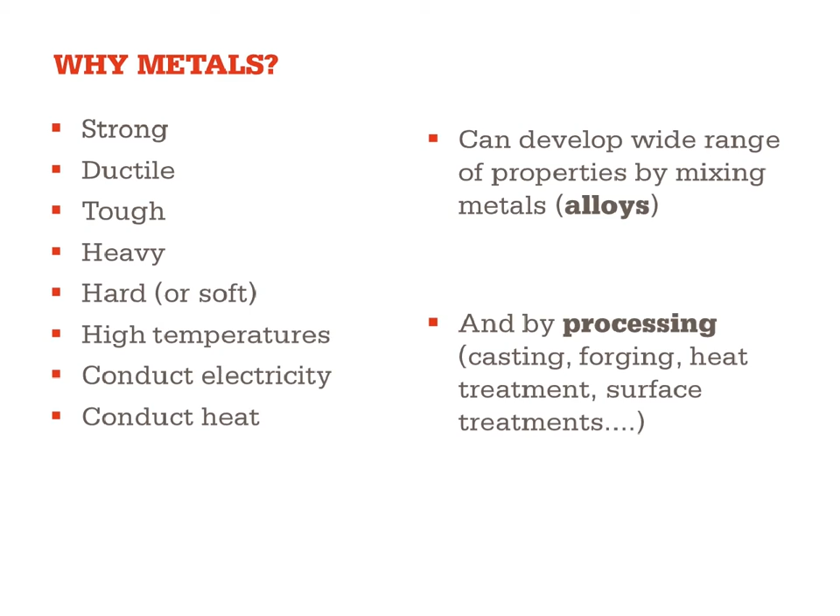There are so many different types of metal and different types of alloy, it's impossible to list them all. There are many thousands. So when you say metal or alloy, you're actually talking about a very wide portfolio, a very wide range of materials. And indeed, for each of those materials, the way in which they're processed makes a dramatic difference to the final properties of the finished product.

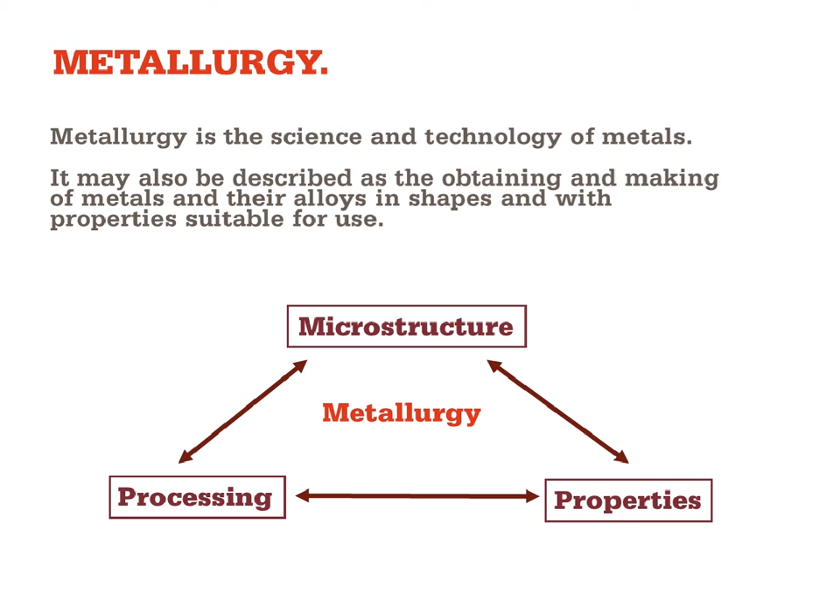For me, the definition of metallurgy really is understanding the manipulation of the microstructure of the material we're dealing with to influence the properties. And that in turn, if you can see the triangular diagram on the screen, the properties influence the way in which the material can be processed. But in fact, processing - heat treating, forging, casting, etc. - does change the microstructure and in turn changes the properties. So this triangle, we go round and round in circles - each of the two aspects influences the other. And that really is the profession of the metallurgist: to understand all of this and to advise engineers and production people on which material to use for a given application, and how to produce the product from that material.

So in the Fundamentals of Metallurgy training course, we explain in fairly simplistic terms that all materials, particularly all metals, are made up of atoms whose size is somewhere between 0.1 and 1 nanometers. We explain what that means - 1 nanometer is 10 to the minus 9 meters - just to get people to understand that we're talking about things happening on an exceedingly fine scale.

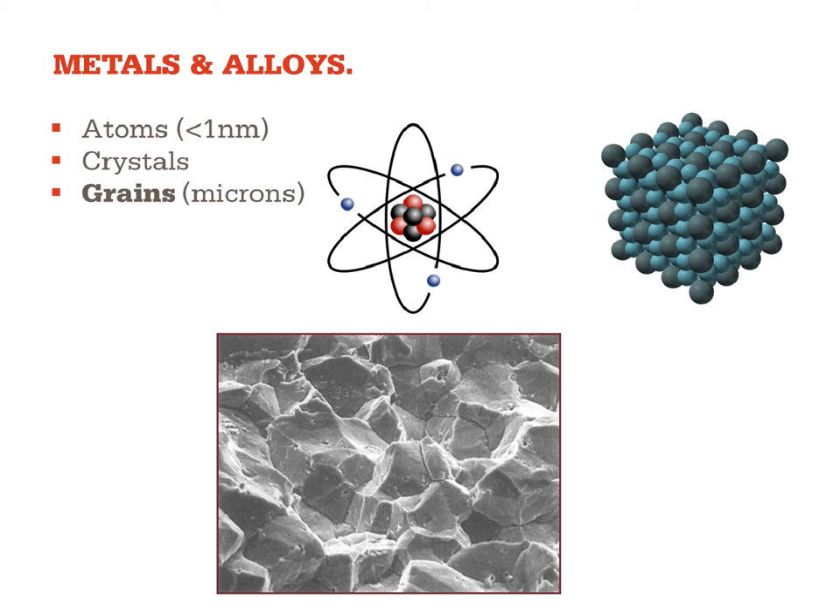We then explain that the atoms are lined up, as you can see on the top right here, into crystals. And then those crystals are organized into grains, which are moderately large chunks of material, as you can see in the image at the bottom. In that course, we explain the relevance between these different features of metals and alloys.

Each pure material, pure metal, will naturally adopt one of those structures in a crystallographic setup. But some materials, notably iron and titanium, actually transform from one structure to another at a critical transition temperature. And that opens up a whole field of heat treatment technologies whereby we can modify the properties of the material by heating and cooling at different rates.

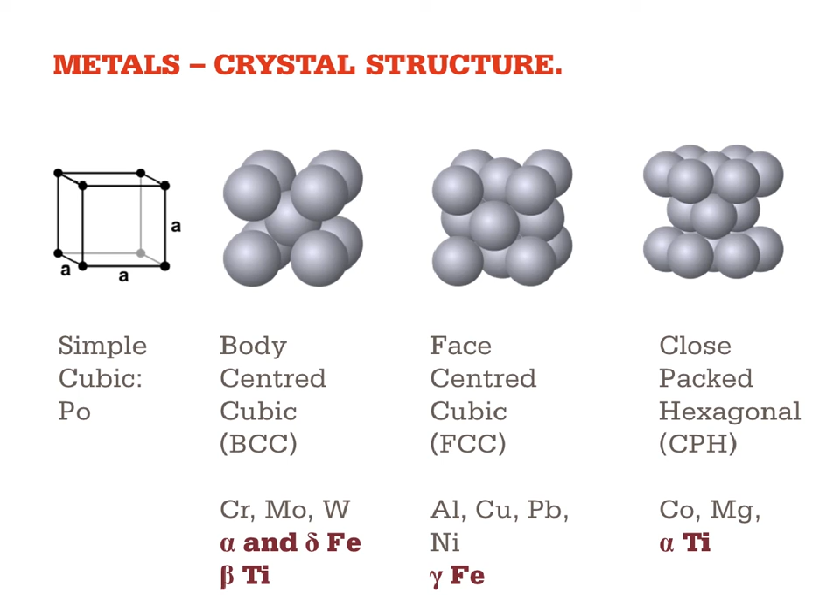So in the fundamentals of metallurgy and the metallurgy for non-metallurgists course, we explain that in more detail.

We also explain that when you are producing an alloy by mixing metals together, or mixing metals and non-metals - for example, introducing a small amount of carbon into iron to produce steel - those elements are not generally soluble to a large extent. So depending on the temperature and the circumstances, iron will only accommodate typically up to 2% of carbon, and under some conditions it's very much less than 2%.

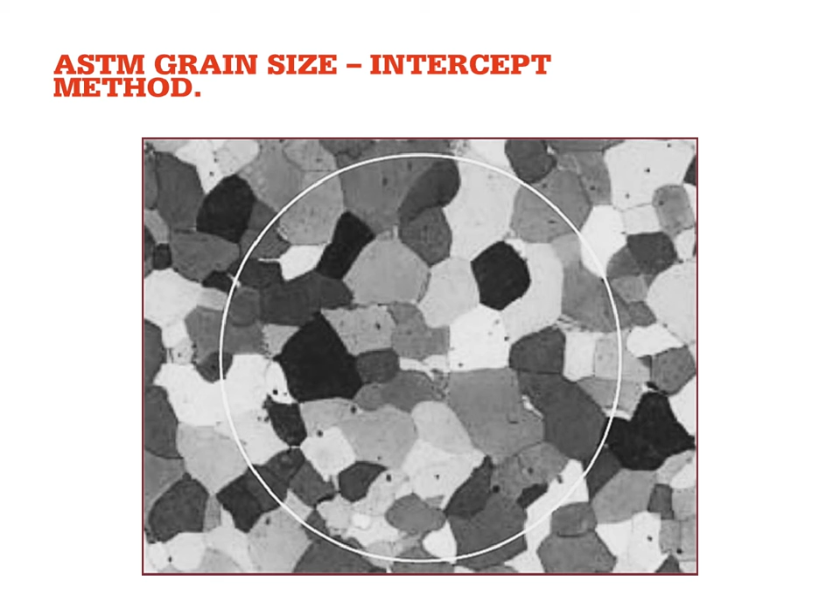Also, the grain size - each grain, in this two-dimensional cross-section through a three-dimensional structure, has a number of phases and a consistent crystalline structure within it. The size and shape of those grains will also have a massive influence on the mechanical properties of the product. So we explain how to manipulate and understand grain sizes.

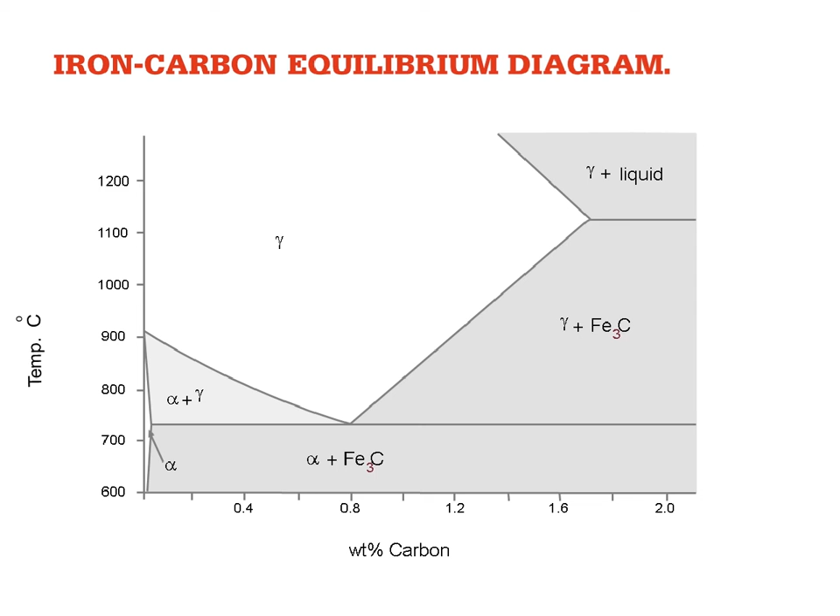Going into a little more depth with steel - I mentioned iron, so on the left of the diagram here, at the origin of this plot we have 0% carbon, pure iron. You can see that the gamma phase in the middle, the rhombus-shaped area, is called austenite. That combination of temperature and carbon content shown in the rhombus labeled austenite is where the carbon is dissolved in the iron, and it's a face-centered cubic structure which we call austenite.

When we come down to lower temperatures, that austenite becomes unstable and separates out into ferrite, which has very, very low solubility of carbon, almost zero, and exists below 900 degrees C. On the right-hand side of the diagram, you can see cementite, iron-3 carbide, which is rich in carbon. So the stripy pearlite structure we were looking at is actually alternating layers of ferrite and cementite, and the morphology of that is critical in determining the strength and other properties of the steel.

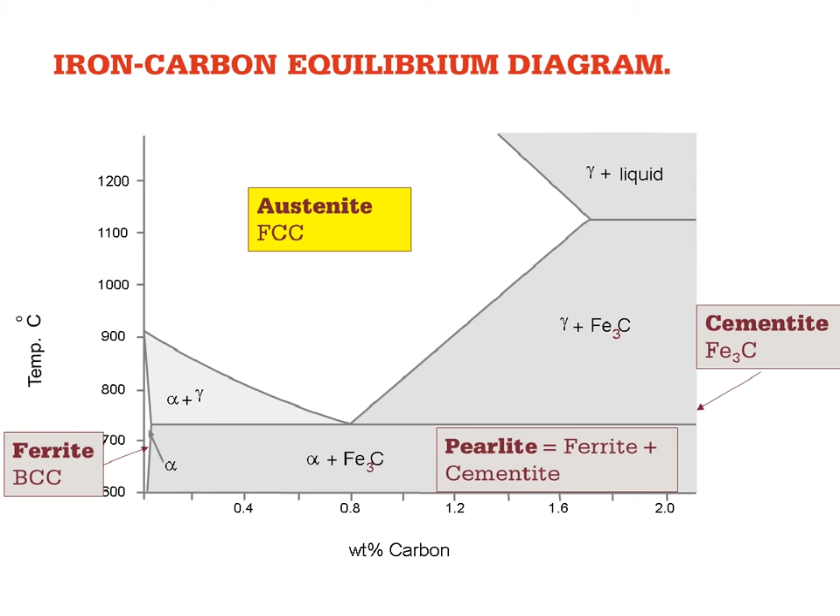And that's explained in great detail in a course, a one-day course, six hours, talking about different types of steel.

So anything we can do to prevent those dislocations from moving around will strengthen the material.

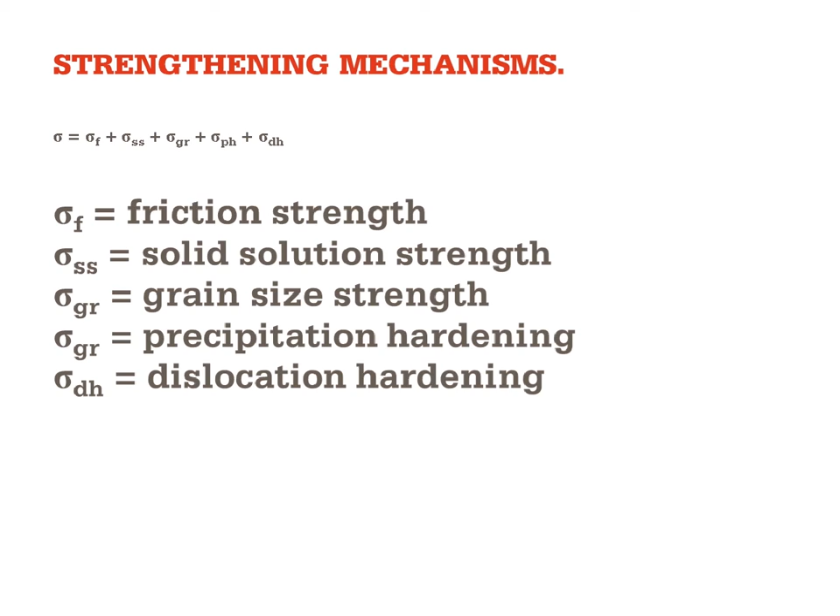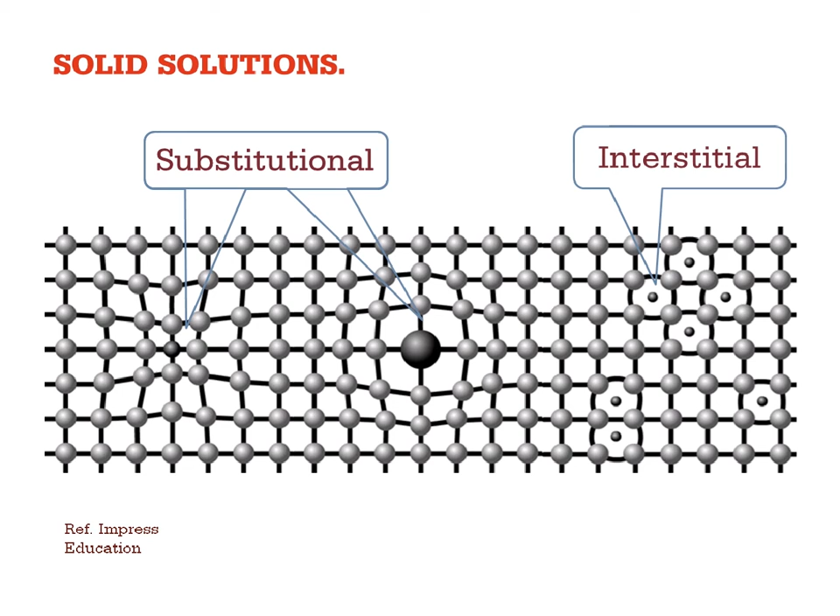If I can move on to give an illustration of a solid solution. Here we have, for example, this could be a copper alloy or a steel, where we've got iron atoms or copper atoms in the majority. If we introduce another atom, it might be slightly smaller or slightly larger than the parent lattice, and that would be a substitutional introduction, or it may be an interstitial atom. So carbon in steel actually sits in between the iron atoms, as you can see on the right. We need to understand all of that to understand the strengthening mechanism due to solid solution, substitutional and interstitial alloying.

We also need to understand the growth and control of precipitates, such as nickel-3 aluminium, and carbides, for example.

Graham, we've got a couple of quick questions here. One of the questions is, why is dislocation necessary for the metallurgist?

It's necessary because the strengthening and control of the material, and the toughening, is all determined by the ability to stop those dislocations from moving, or to make it more difficult for them to move. The way we do that is by introducing or constructing alloys with different combinations of metals. For example, the precipitates you can see here are nickel-3 aluminium, so we need to understand the amount of nickel and aluminium to introduce into our alloy, and then how to heat and cool it to get these precipitates. They are very tiny in this instance, to make sure they have the correct size and volume to give the maximum strengthening effect. So the metallurgist has to understand all that, and that's what you would learn if you were to do a degree in metallurgy at university.

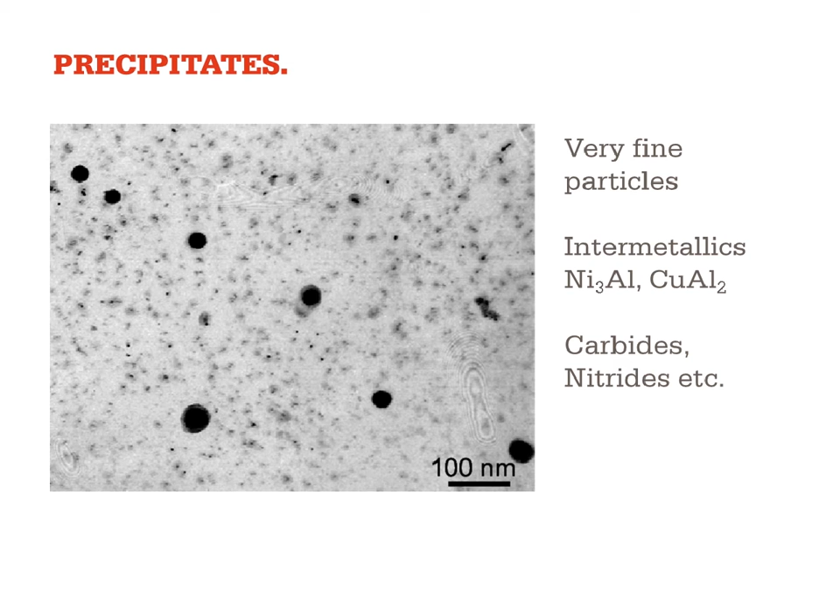Okay, and just one more on the dislocation side. Does a dislocation result in ductility?

A dislocation moving results in ductility, yes. So if there were no dislocations, the material would not be ductile. The more you have, and the more mobile they are, the more ductile the material, unless you get to a point where you have so many that they actually interfere with each other, and that's the basis of work hardening, if you're familiar with that term.

Particularly in cold forming, if you repetitively roll a material to form a sheet, you'll get to a point where you've rolled it so much, you've produced so many dislocations that it actually becomes brittle and the sheet will shatter. A simpler illustration is if you take a paper clip, straighten it, and then bend it back and forth. It will be ductile initially, easy to bend, and when you've done it ten or twelve times, it will break because it's become brittle. That's due to the generation of a very large number of dislocations.

Okay, so I'd like now just very briefly to describe what is contained in the training courses dealing with carbon steels, stainless steels, and a family of non-ferrous alloys.

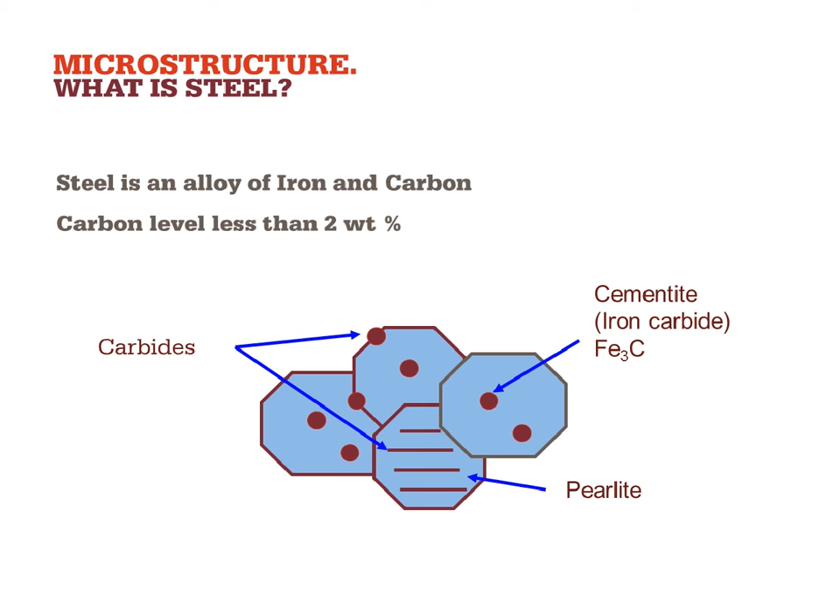So to control steel, and to understand steel metallurgy, we need to understand the role of those alloying elements, those metals, but very importantly, we have to understand the role of carbon. As I said, a 2% carbon steel would be a very high level. Typically, we would have less than 0.5%, less than 0.1% of carbon in some cases. And we have to understand where that carbon resides. This is a schematic illustration of the stripy pearlite structure that I mentioned, but also there can be a tendency for freestanding carbide particulates to form, and those will also contribute to the mechanical properties of the material. So we need to understand all of that.

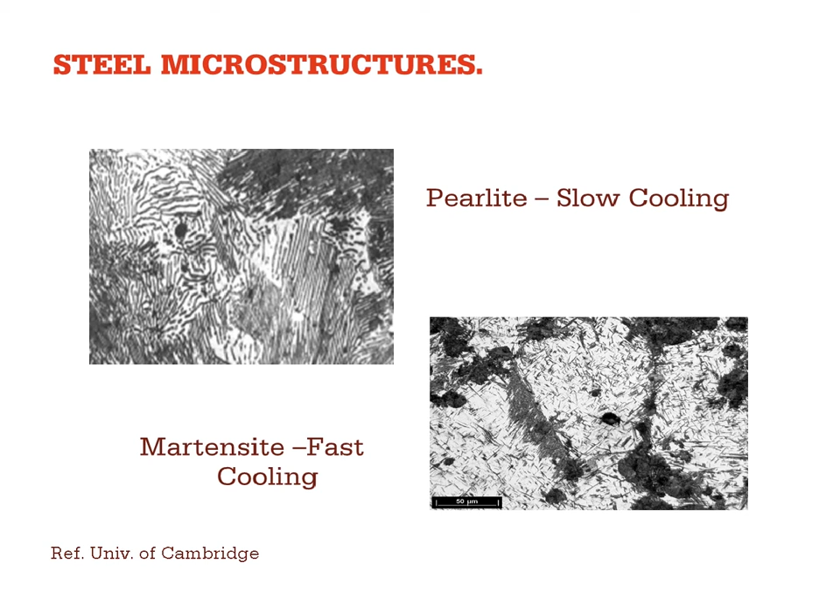We also have to understand the consequence of varying the cooling rate. So if we take a material up to the austenite region, which on the phase diagram would typically be around 950 degrees C, if we cool it slowly, we get the pearlite structure. If we cool it very quickly from 950, we actually get something very different. This is dealt with in the heat treatment training course. The mechanical properties and the way in which pearlite and martensite will perform in service are very, very different. And it's exceedingly important that we understand that.

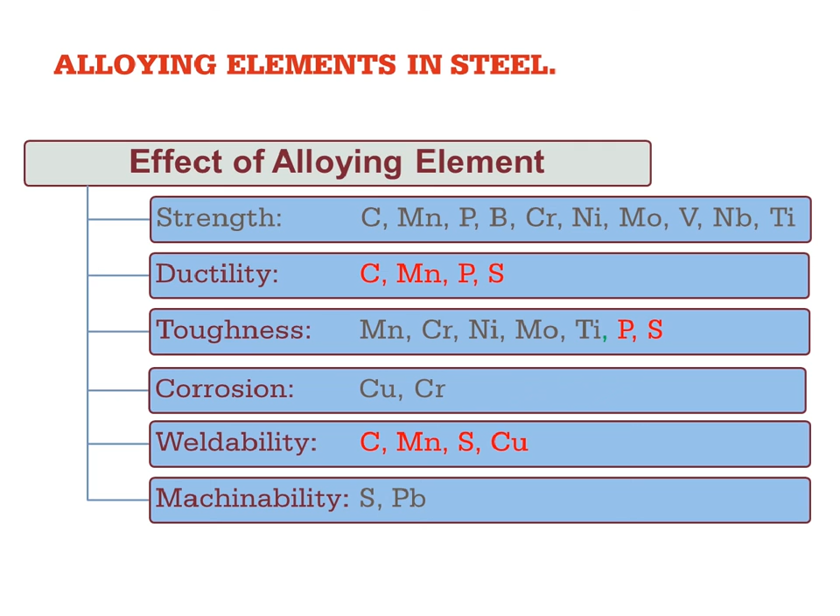And we also need to understand the effect of the various alloying elements that I've mentioned. On this slide, the red ones mean that if you have too much of these alloying elements, they will have a negative effect. So too much phosphorus or sulfur will reduce the ductility and reduce the toughness, whereas manganese, chromium and nickel will increase the toughness. Weldability is poor if you've got too much carbon. Sulfur again is bad news. So we have to understand the science behind the influence of all of these alloying elements on these various mechanical properties.

Graham, I've got another question coming in here, if you're happy to. Can the mechanical property be changed? Can the mechanical property be changed infinitely by changing its temperature, or is there a certain limit to this change?

That's from Manish. No, there is a limit. There are upper and lower limits, but with some steels, you can change the tensile strength or the toughness or the hardness for exactly the same piece of material with the same chemical composition. If you heat it up and cool it slowly, it will have one strength. If you heat it up and cool it very quickly, it could be 10 times the strength. So you can vary these mechanical properties by a factor of 10 in some cases. And these are reversible reactions.

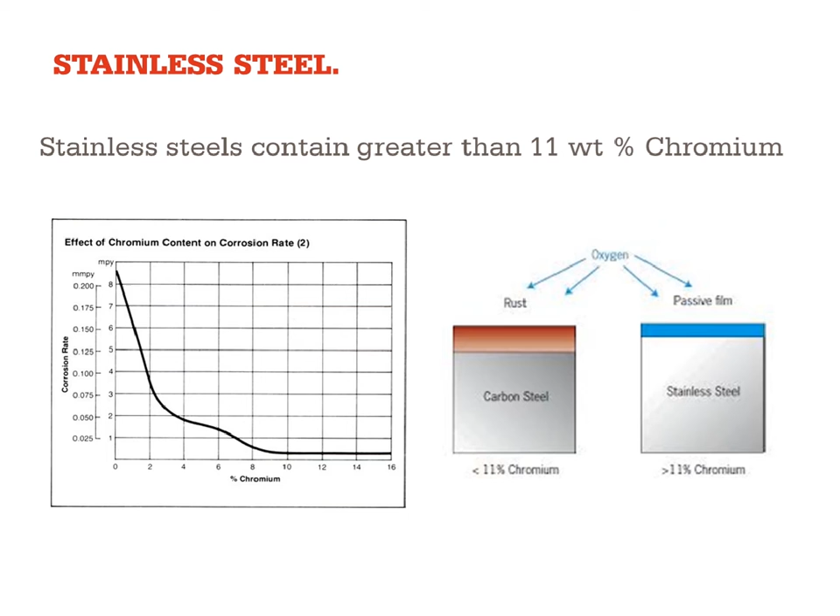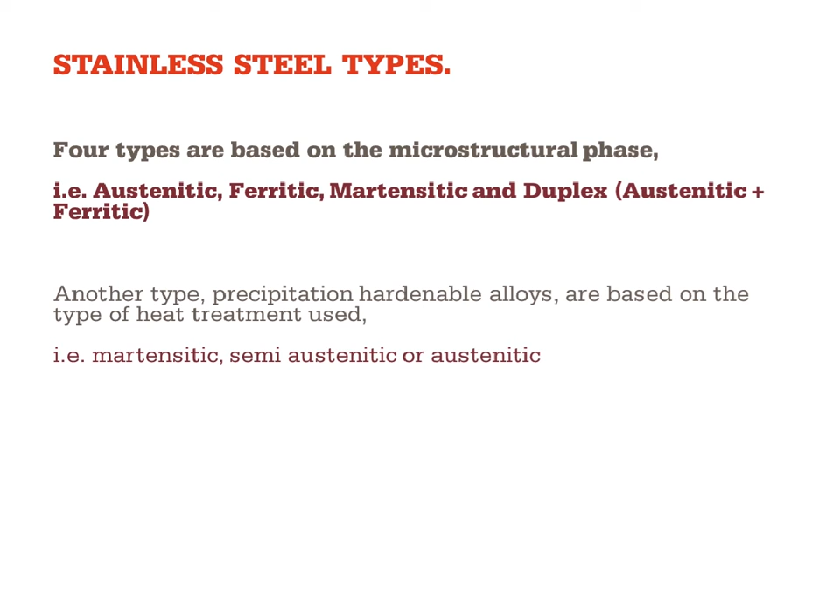Stainless steel—here we are looking at a plot of the rate of corrosion as a function of chromium content, and you can see it drops off rapidly, with the cutoff generally at about 11%. So for a material to be a stainless steel, it should have at least 11% chromium. There are many different grades of stainless steel, and we have a full 6-hour training course explaining the differences between austenitic, ferritic, martensitic, and duplex stainless steels, and also precipitation hardened steels. I apologize, I just don't have time to go into all the detail of those today.

I'd like to move on just quickly to touch on aluminium alloys. These are rather different—the melting point of aluminium is 660, while the melting point of iron and steel is about 1,600. But aluminium, as you'll be aware, is very much lighter. So for lower temperature applications where weight is important, aluminium may be the material of choice.

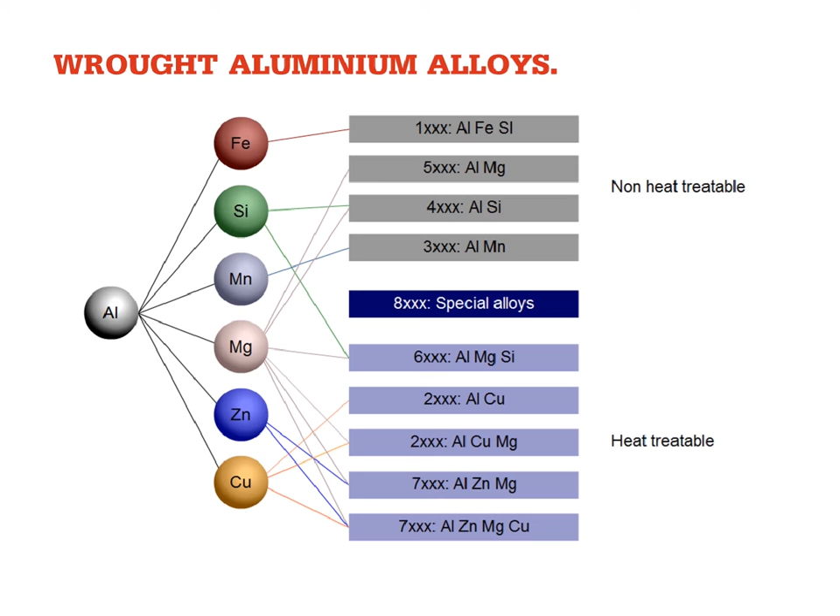There is a systematic nomenclature for the different types of alloy depending on the principal alloying element. So if it's mainly aluminium but the second most common element is iron, then it's a 1 series, and you can see the other series here. Some of these can be heat treated, others can't, and there's a lot of science and understanding behind the different types of aluminium alloy and how you select and control them for different applications.

In the course on aluminium alloys, we would go into detail looking at the applications in aerospace, as you can see here, food containers, takeaway meals. A lot of engine blocks for vehicle engines are cast in aluminium for weight saving. We've got here a petrol tank, bottom left. Aluminium alloys are used in architectural applications and also for automotive vehicles.

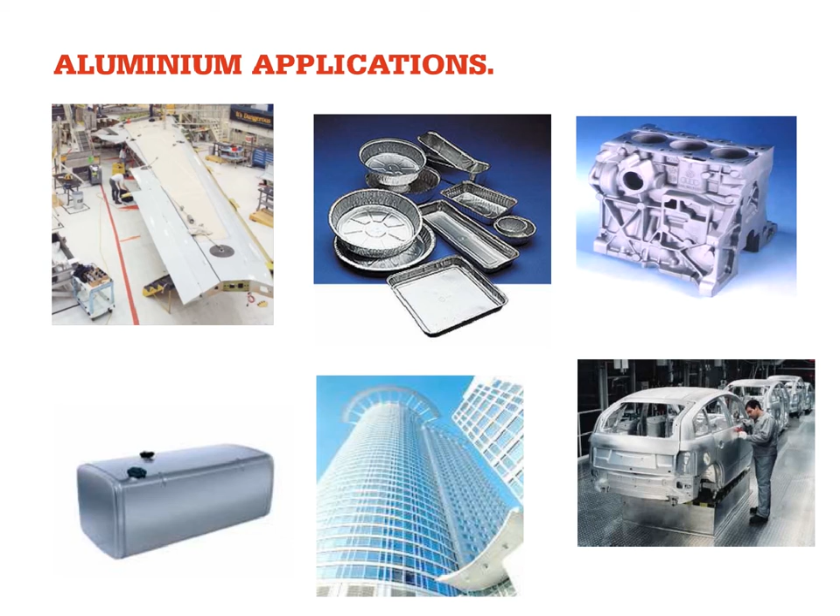Another category of non-ferrous alloys are the titanium alloys, and there are a wide range of those, many of which are heat treatable, because I mentioned briefly that iron has a transition at 910 degrees C in its basic fundamental crystal structure. Well, titanium does something similar at 883 degrees C. So we can use that to our advantage by adding different alloying elements and creating what we call alpha or beta alloys. You can see here some of the chemical compositions: titanium plus additions of aluminium and vanadium.

This one, so-called 6-4, or titanium grade 5, accounts for about 75% of all titanium alloys. It's very much the workhorse because it has an alpha and beta structure, and that's used for a very wide range of applications.

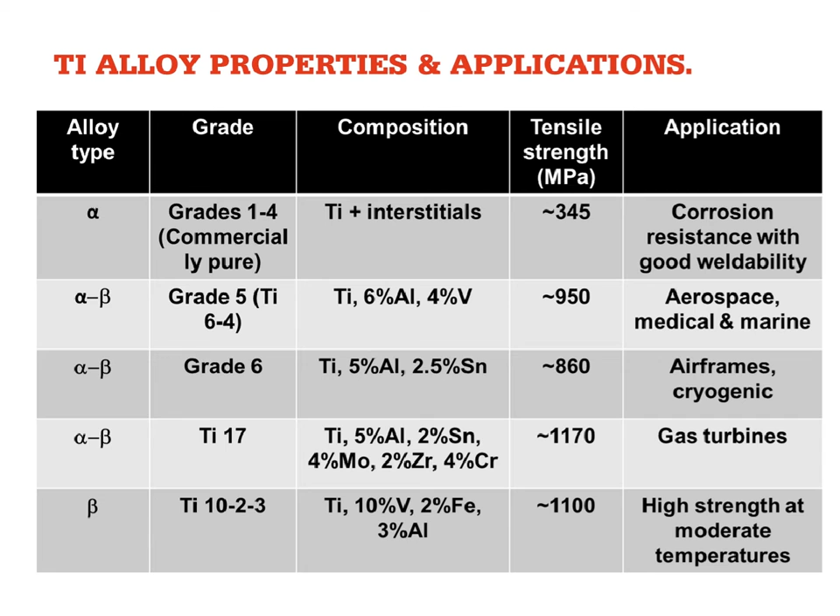Titanium is quite expensive, but it has special properties which make it the material of choice for particularly higher temperature, corrosion resistant applications, but also it's relatively light.

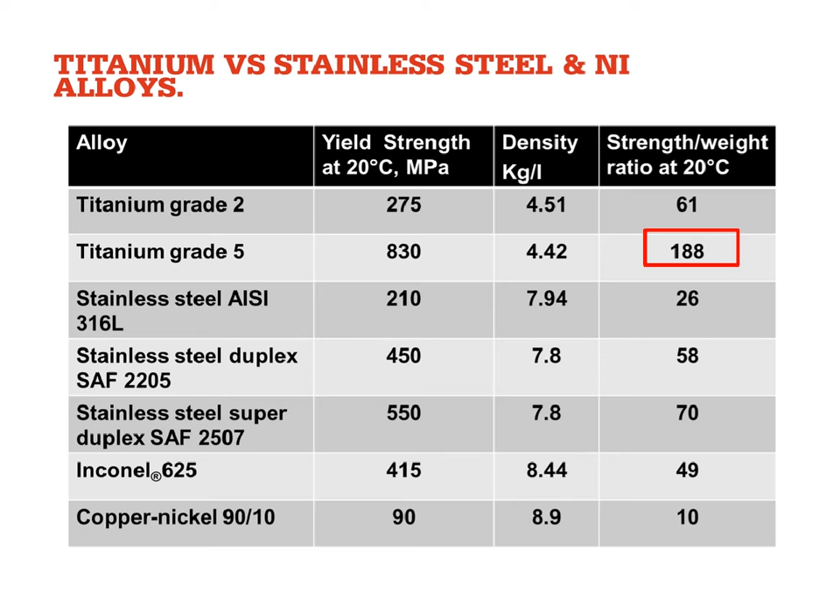So if you're looking at strength to weight ratio as your main criterion, perhaps a classic example is the landing gear in an aircraft, where you want it to have the strength to do its job when you land the aircraft. When you're flying, you don't want it to be too heavy because that costs a lot of money in fuel. So you can see here for grade 5, the strength to weight ratio at 188 is very much higher than, say, stainless steel or other forms of steel. That is where titanium alloys come into their own.

There are other applications in chemical processing. The oil and gas industry makes use of the chemical and corrosion resistance of titanium alloys. In biomedical applications, titanium is resistant to corrosion by blood and bodily fluids, so if you need a hip transplant or a false knee, that's very likely to be titanium. It's also used in armor because of its high strength to weight ratio and impact resistance, and in aerospace, particularly military applications. So if you can afford to use titanium it's an excellent material, but for some industry sectors it's simply prohibitive on cost.

Finally, we move on to the nickel-based alloys. Nickel has a face-centered cubic structure at all temperatures, as does aluminium. That means we are limited in the way we can heat treat nickel alloys, but we can strengthen them by replacing some of the nickel atoms on the lattice with other metals, using the substitutional strengthening mechanism.

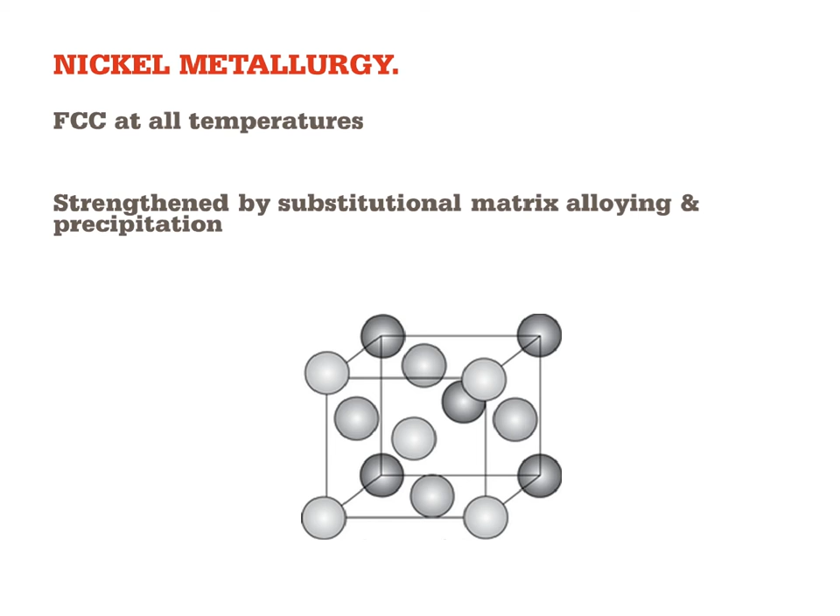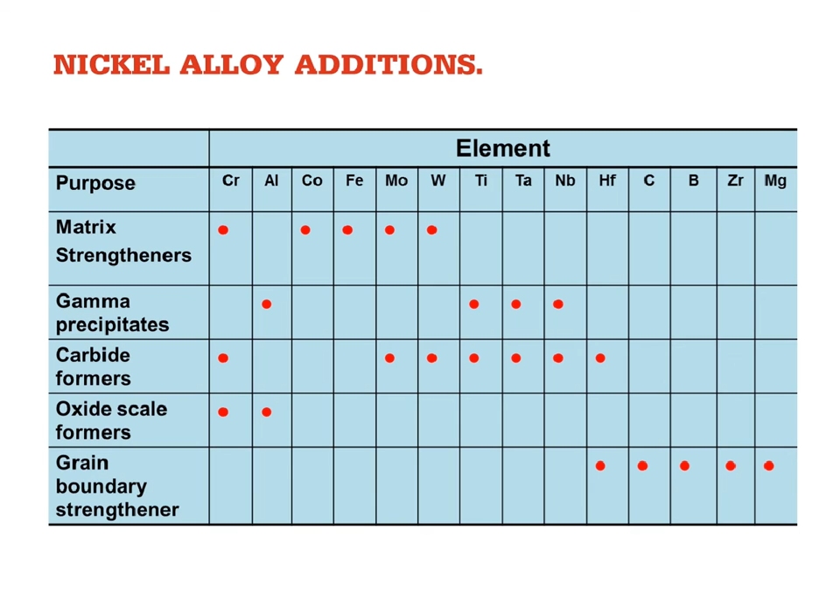But the main metallurgical feature of nickel alloys is a large number of different forms of precipitate, growing very small volumes of precipitate materials, for example using titanium, tantalum, niobium. We can grow carbides of chromium, molybdenum, hafnium, as you can see here. Sometimes we want to grow precipitates on the grain boundaries to prevent them from moving, particularly for creep resistance, so things like boron and zirconium would be used for that.

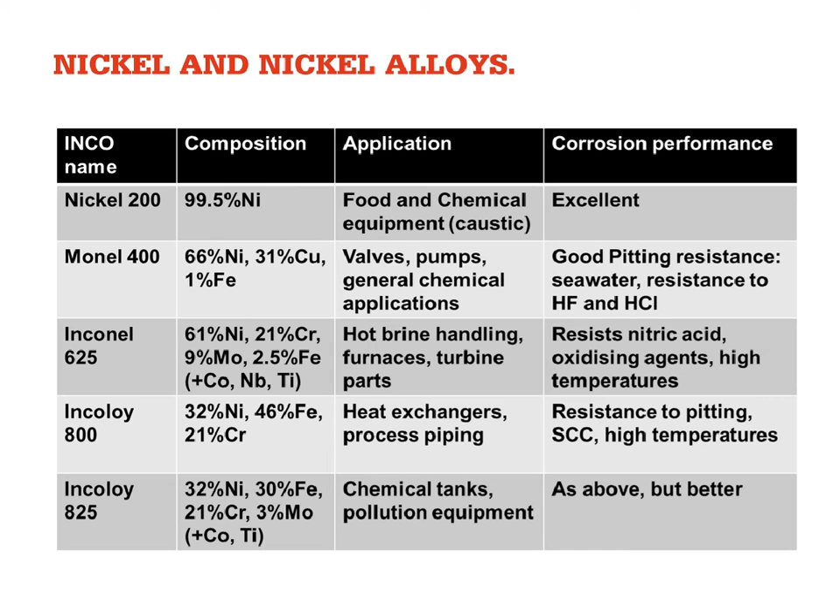In the non-ferrous alloy course we go through various grades of different types of nickel alloy. You may have heard of some of these: Inconel, Incoloy, 625, 718 is another one not mentioned here. The different chemical additions made to nickel to form these alloys, how they are heat treated, and a wide range of applications, very often revolving around corrosion resistance but also high temperature. Nickel is again an expensive material, but there are situations in chemical processing where it really is the only viable material. It's also used extensively in the oil and gas industry.

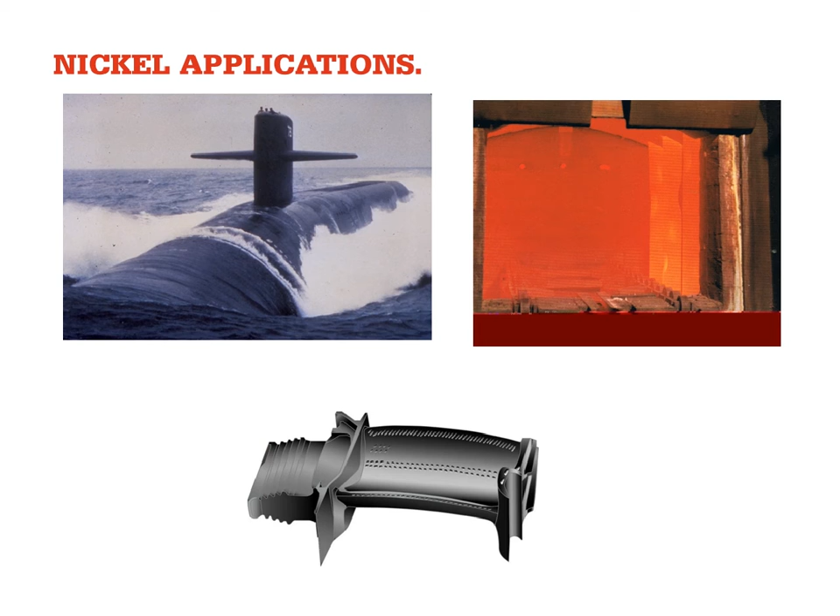Typical applications would be perhaps offshore—here's a picture of a submarine. Also a specialized application is in single crystal turbine blades for jet engines and gas turbines, where the precipitation strengthening of the nickel alloys increases their creep resistance at very high temperatures, which is the limiting factor for these high pressure turbine blades. We need creep resistance at the highest possible temperature—the hotter you can run your engine, the greater the fuel efficiency. And finally, this orange picture shows the application of nickel as the containment in a high temperature furnace.

So I now wanted to move on to look at how we manufacture products from these various alloys. Most of the manufacturing processes can be applied to most of the alloys we're concerned with, with varying degrees of success. There are 4 training courses, each of 6 hours duration, that deal with this in a lot more detail. One way in which we can make shapes is by casting, and there are 3 generic forms of casting.

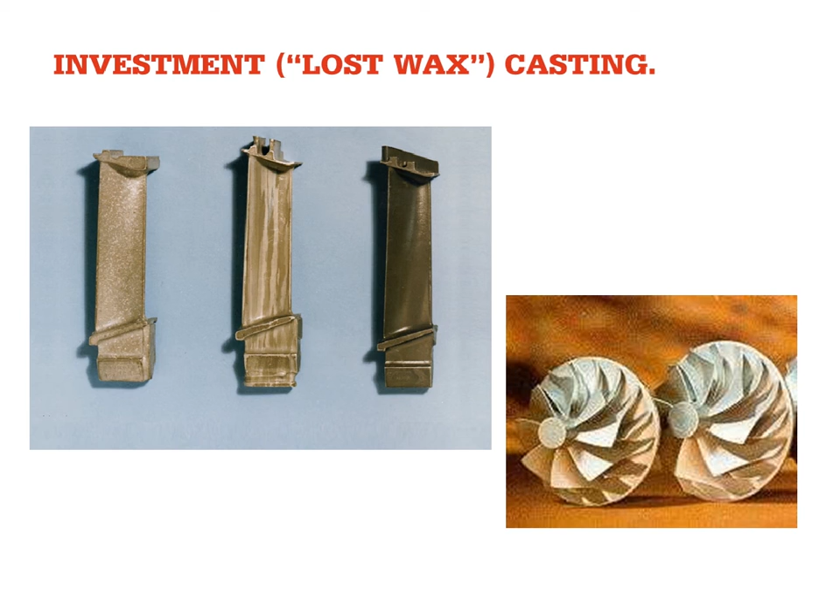The lost wax process, or investment casting, is used for turbine blades and also for things like impellers. Here we make a model of the piece we are going to produce in wax, then coat that wax with a ceramic high temperature refractory material. We bake that to cure the ceramic and melt the wax, so we have a ceramic shell with a cavity of the correct shape. We pour the liquid metal into that cavity, and when it's cooled and solidified, we smash away the ceramic shell and are left with the solid metal product. That is, very simplistically, the investment casting process.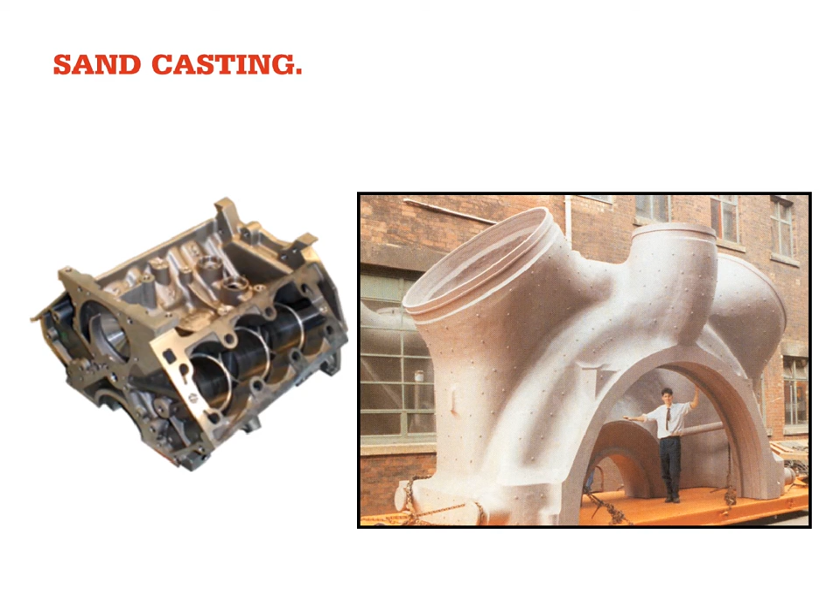An alternative is sand casting, used for things like vehicle engine blocks, and this very large junction here is for an offshore pipeline in the oil and gas industry. Here we make a pattern of the product we're trying to produce, then surround that in a box, fill the box with sand with a binder, and compact it. We remove the pattern and put two mold parts together from sand, which again enclose a cavity into which the liquid metal is poured, solidified, and when it's solid and cool, we break away the sand and are left with the shape we require. Both of these techniques are destructive in that the mold or die can only be used once.

If we go on to die casting, often used for low temperature materials like aluminium or magnesium alloys, we use a metal die into which is machined the cavity of the shape we require. We pour the liquid metal into that cavity. When it's solid, we open the two parts of the die, recover the part, and can immediately reuse the die by closing it and pouring fresh metal in. So that lends itself to automation.

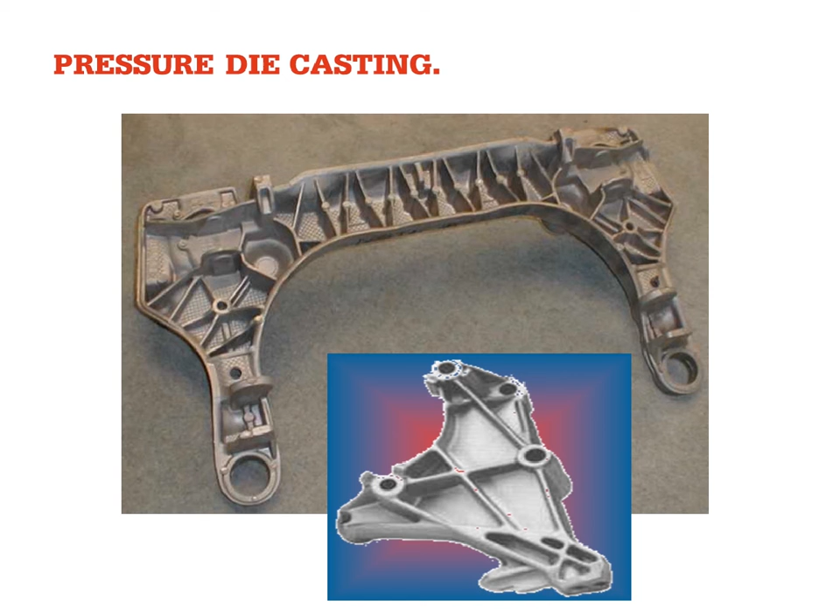So for large volumes of quite intricate shapes, we may well be using a die casting process. We can also inject the metal at a high temperature and a high pressure, and we can control the temperature of the dies more accurately, so that gives us a greater degree of process control.

So casting as a generic process, be it investment casting, sand casting, or die casting, has the advantages that it can produce very complex shapes. You can make products close to net shape, so only a small amount of machining is required to get the finished product. It's applicable to a vast range of sizes, from a few grams up to a few hundred tons, and it's amenable to mass production of large volumes of products.

Some of the disadvantages of casting are that we have limited control over the microstructure of the product, so there is a tendency for porosity to be introduced.

Sorry, I'm just trying to move back to here, we are.

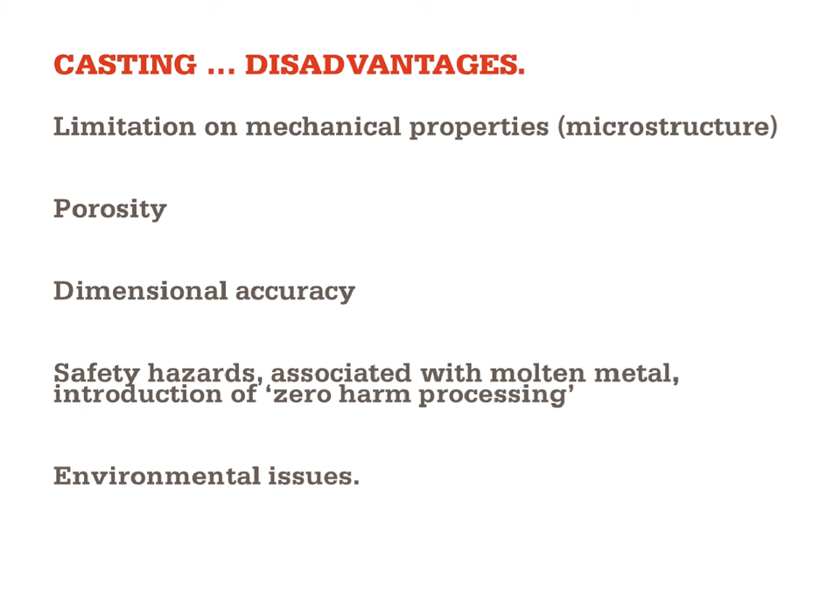Porosity, and also dimensional accuracy, can suffer, because if you think about it, we've produced a cavity, poured liquid metal into that cavity, and that metal then solidifies. But all metals and alloys have a coefficient of thermal expansion, and when the material solidifies from just below its melting point down to room temperature, it will contract by typically 3 to 4%. So the dimensions of the finished product are not the same as the dimensions of the model we started with.

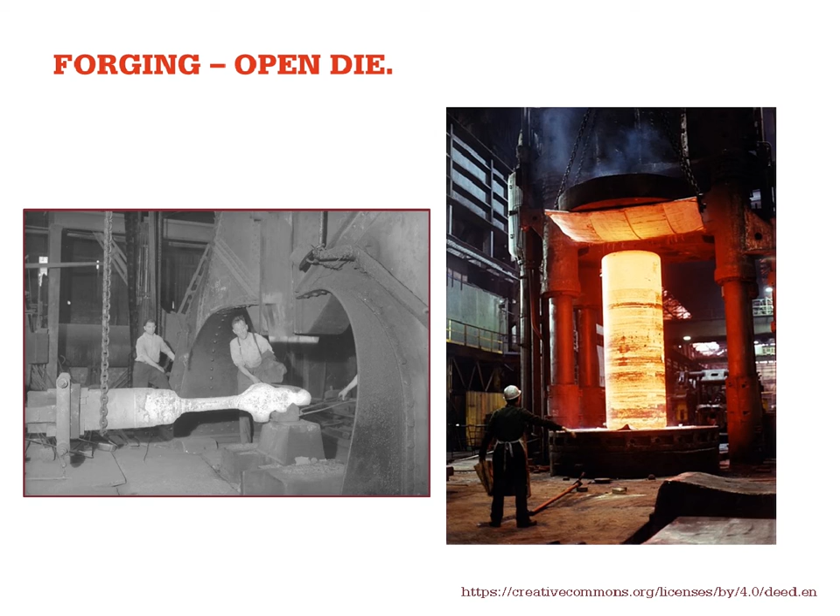It will have been produced by pouring liquid metal into the mould, and the fact that open die forging is used to mechanically deform the material, normally at high temperature, removes defects from casting, but it does not usually produce a useful shape that can be used for an engineering application.

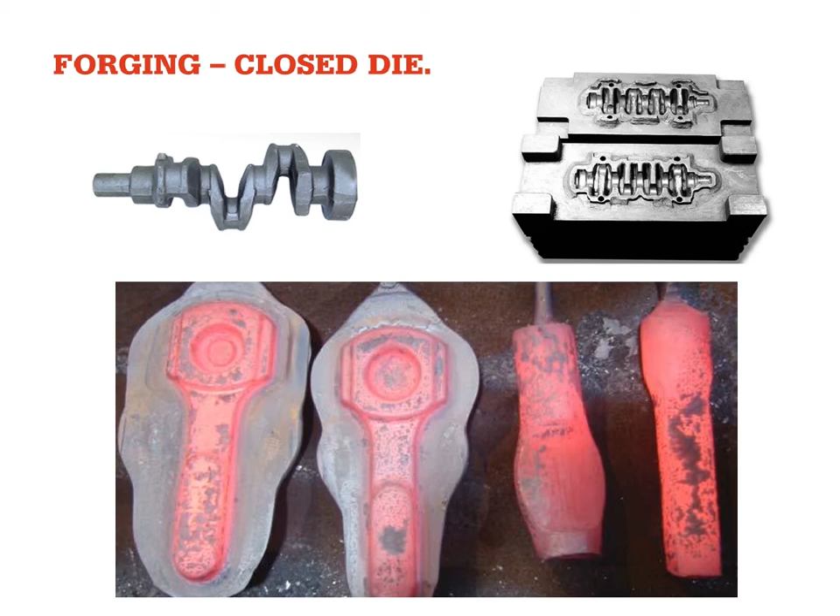To make useful shapes, we would use a closed die forging situation. So here you can see the crankshaft from a vehicle engine, which would be manufactured in several stages using profiled dies such as this, and you can see moving from right to left we're getting closer and closer to the finished shape. So forging is an alternative to casting for shape manufacture.

It has the advantages that it strengthens the material. You can also modify the grain size and structure, and remove any chemical inhomogeneities. So you get a better, stronger, more reliable material from forging than you do from casting.

Disadvantages are mainly to do with cost. The forging press is quite an expensive piece of equipment, the dies are expensive to manufacture and to maintain, and there are some limitations on shape.

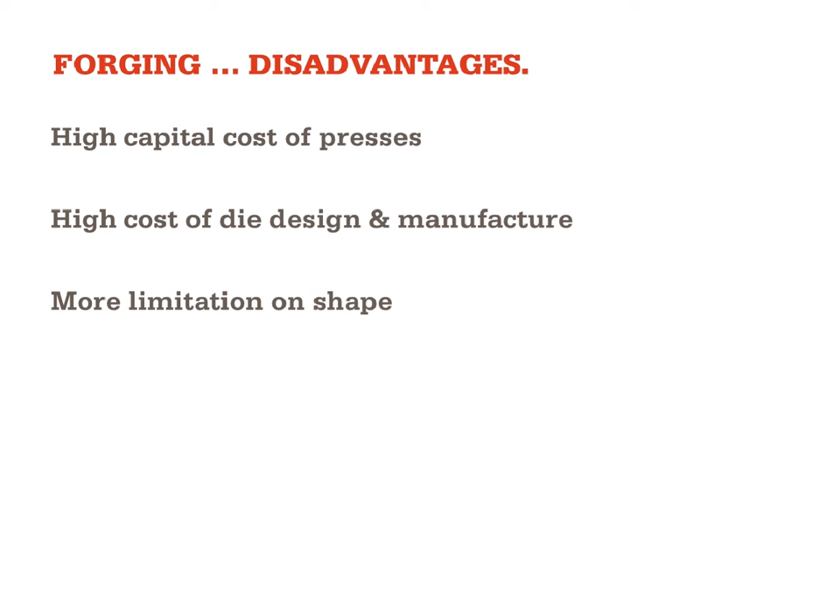Now, I've mentioned heat treatment several times. We actually have two full-day courses, one on the principles of heat treatment and the other on the more practical aspects. Heat treatment of products in manufacturing is generally carried out by specialist companies, and it will be done for many reasons: sometimes to increase the strength, the wear resistance, or the ductility, to increase or reduce the ductility, the toughness, or sometimes to remove internal stresses.

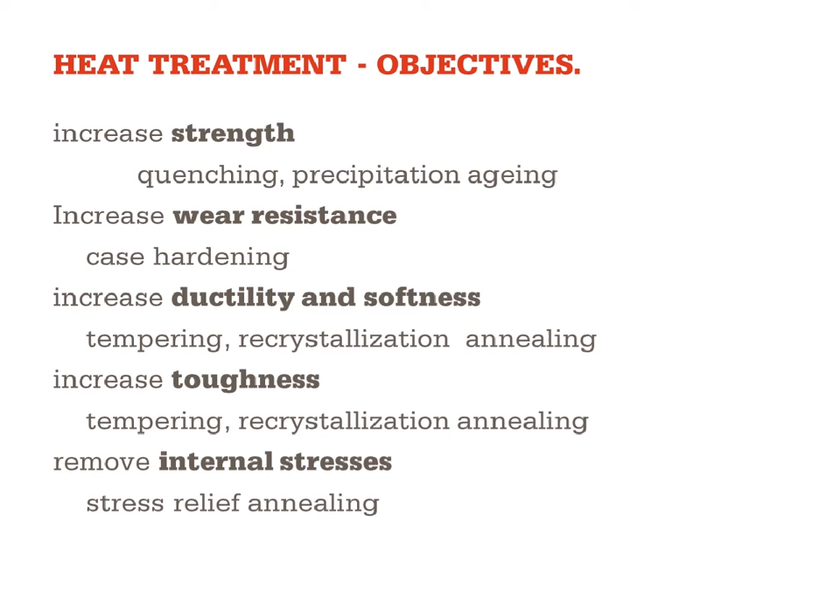So if we've machined or perhaps welded a component, there will be residual stresses which could lead to failures in service. By post-weld heat treating, we can relieve those stresses. We also have opportunities in heat treatment to increase the machinability, to make a product easier to machine. The cutting tools with which we carry out the machining would be heat treated to make them very hard.

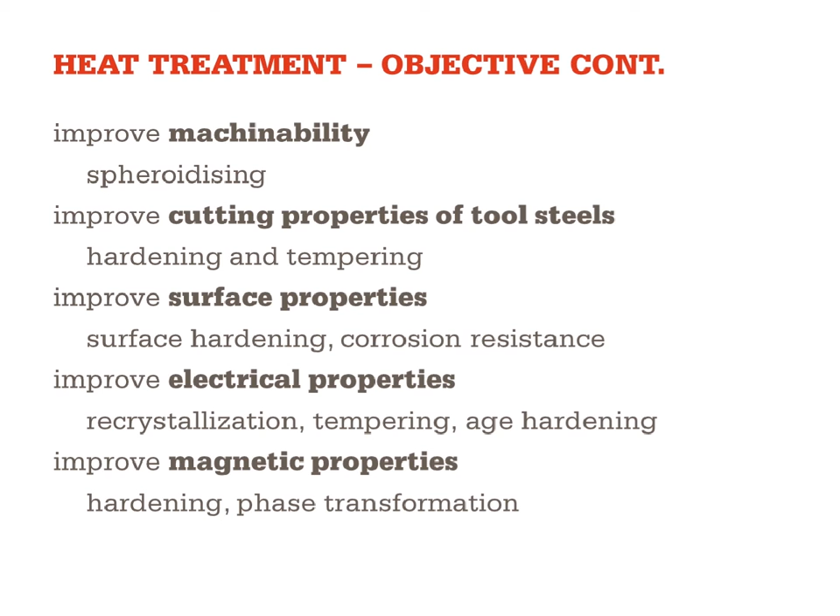We can also change the surface electrical and magnetic properties. So there are many reasons and different forms of heat treatment.

I'm just going to go back to the steel diagram again. If you remember, I showed you the phase diagram where austenite was the stable phase at around 950, and it has the face-centered cubic structure. I mentioned if we cool it slowly, we get pearlite. If we cool it quickly, we get the martensite structure. And if we cool it at an intermediate rate, we get another structure called bainite.

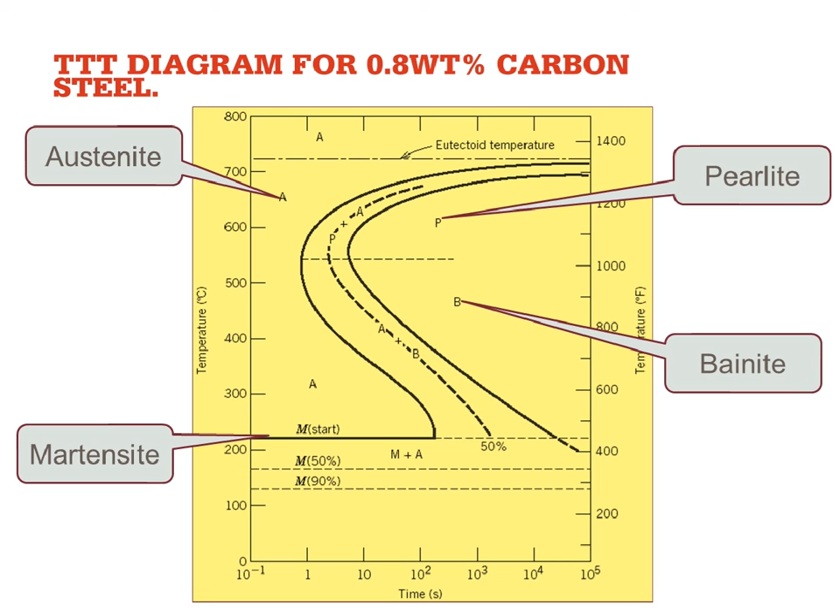In that particular steel course and the heat treatment course, we spend a lot of time explaining that and how these diagrams are used and what they mean. And this is important for the dialogue between the manufacturer of a component, the heat treater to whom he's sending his parts, and also the end user. We have to have a common language to make sure that we all understand how we're specifying manufacturing processes.

So I think somebody asked me before, what is the difference between martensite and austenite? Well, in most cases, austenite only exists at the high temperature. So assuming you've got a part that's operating at room temperature, it won't be austenite, certainly if it's a normal alloy steel. But it might be one of these: martensite, pearlite or ferrite. And it really depends on the combination of strength, ductility and toughness that you require. You have the ability as a heat treater to select the heat treatment to give whatever combination of properties you want.

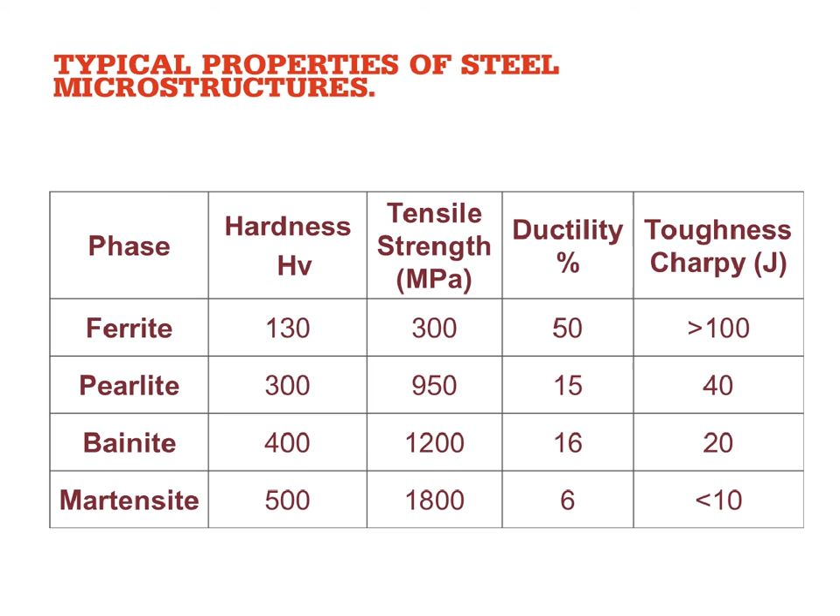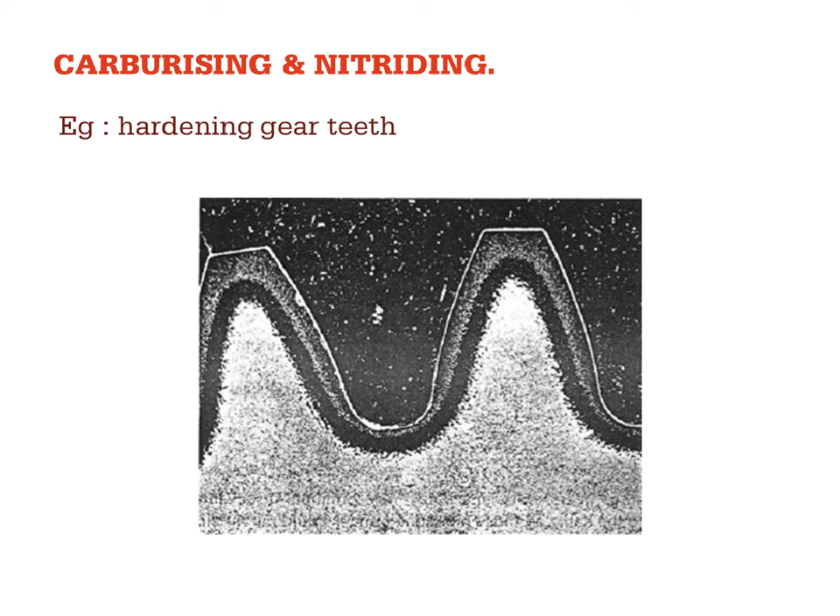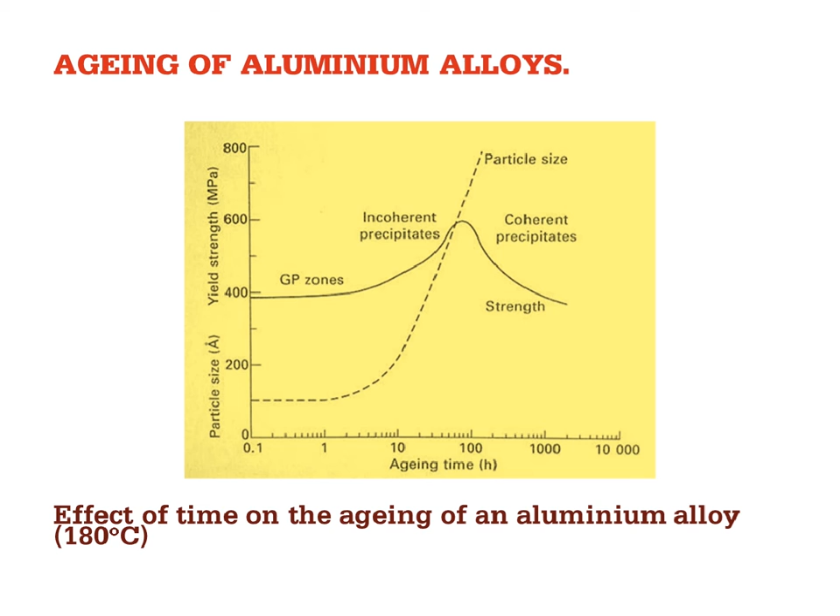If we then age it at 180 degrees C, we will start to grow precipitates of copper aluminium 2. The dotted line shows the average particle size, and after about 10 hours at 180, the particle size increases and increases. The solid line, starting at 400, shows the strength of the material. As the particles increase in size, the strength goes up, then we reach a peak, and if we continue to age for too long, the particles become too large and the strength decreases again. A heat treater would understand this and know what combination of time and temperature gives the optimum strength of the material. That's covered in great depth in the aluminium training courses we offer.

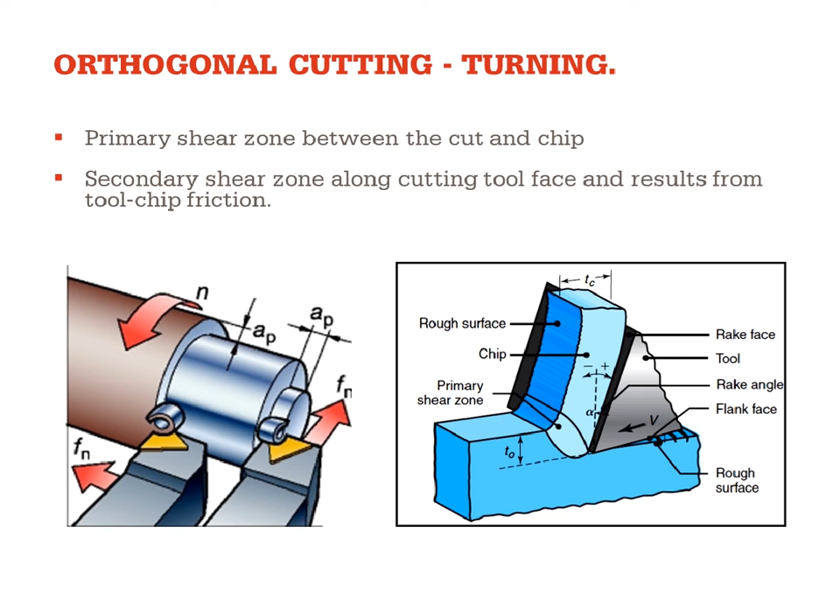When we come to machining to get the very fine detail of a shape, we are looking at the interaction between the substrate, shown in blue here as the material we're machining, and the black triangle, the cutting tool that is removing material. In this picture we're looking at the turning operation, so the cylindrical component is rotating, and the cutting tool is being forced into it and peeling off the material.

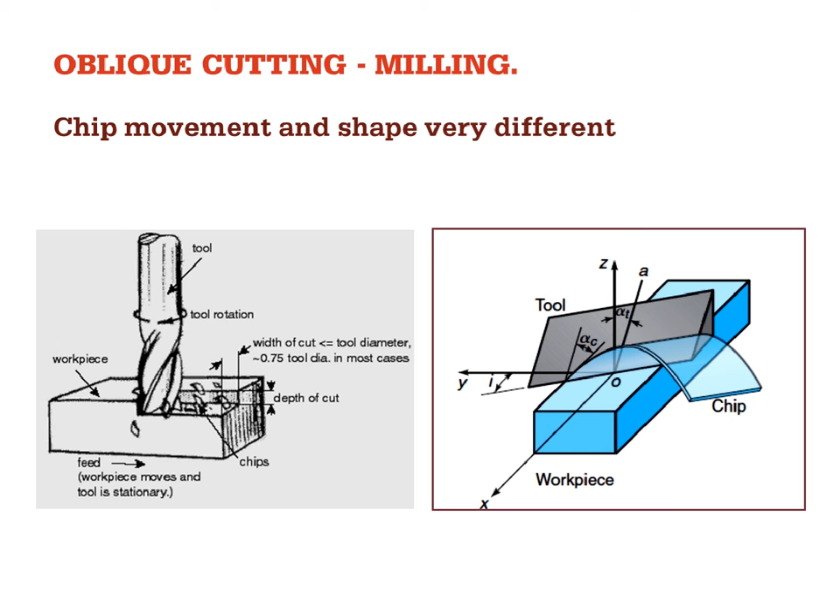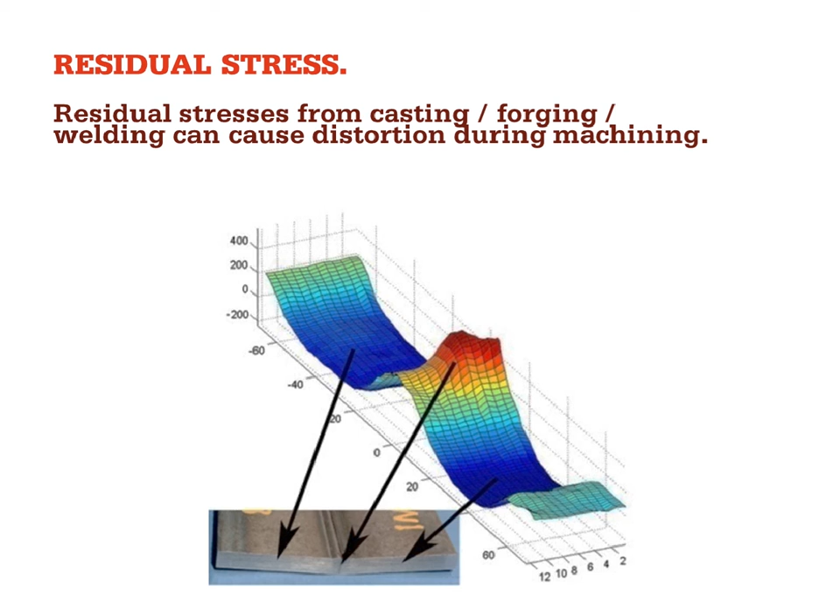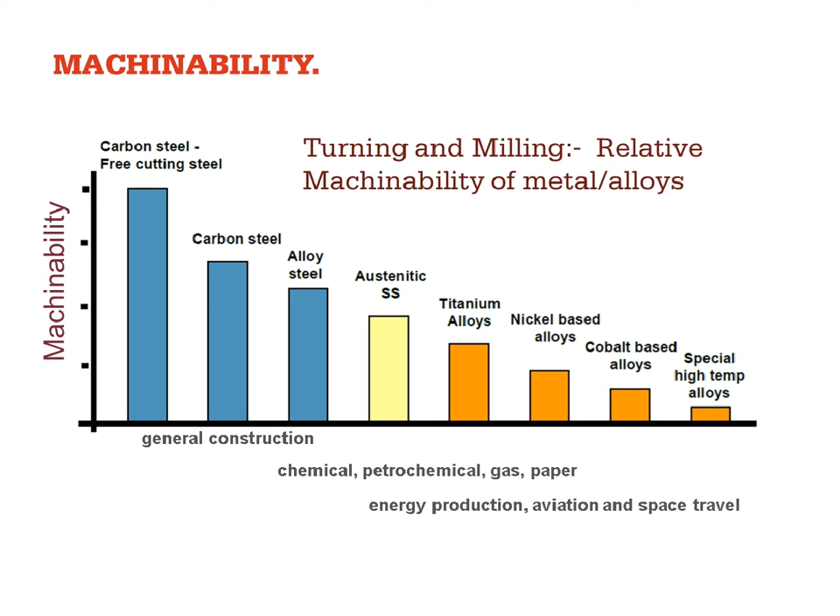I now wanted to talk briefly about welding. As you will all be aware, welding is a process by which we join two pieces of metal together by melting the interface between them and allowing it to solidify. So in effect, it's a kind of casting process.

There are several forms of welding, I just want to talk briefly about two. The very common manual metal arc welding process consists of striking an arc using an electrical power supply between a feed rod and the substrate being welded. That feed rod melts and becomes part of the weld pool, so the rod becomes part of the weld metal, and it's coated by a flux, a material that will melt and then evaporate to form a gas shield which prevents the liquid metal from becoming oxidized, because this process is used normally in the open air and often out in the field, for example welding together gas pipelines in Siberia or in the desert. Manual metal arc welding is a portable technique.

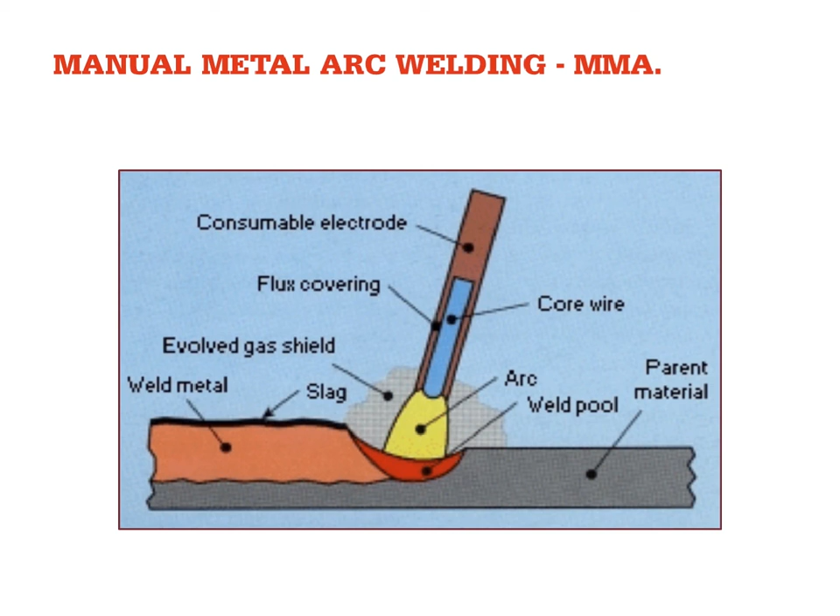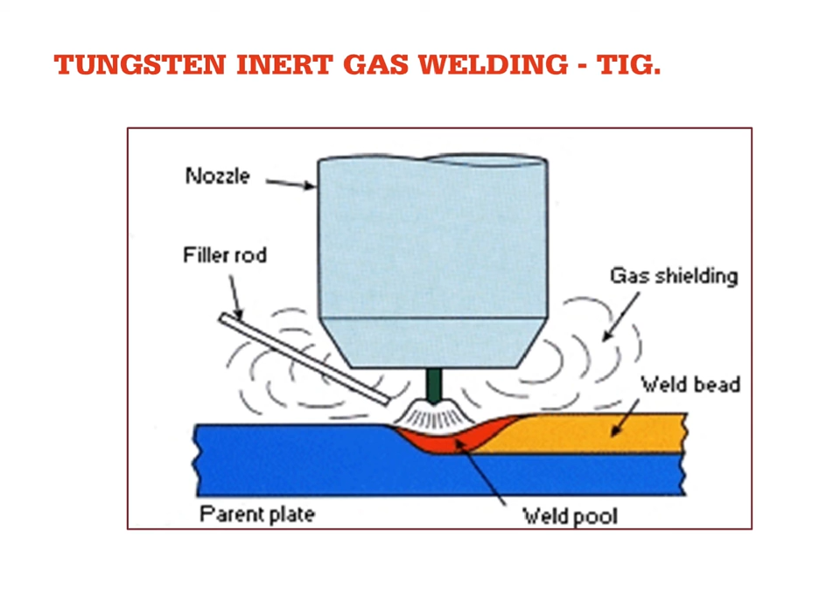Tungsten inert gas welding uses a similar kind of setup. Here we have an electrode and we're striking an arc between the electrode and the parent plate. But in this case, the electrode is made of tungsten metal and it doesn't melt. Tungsten has a very high melting point and it's simply there to conduct the electricity to form the arc. Rather than having flux, we now have a flow of inert gas, normally argon, down the annular gap between the nozzle and the tungsten rod. We very often feed metal into the weld pool using a filler rod. So that's another way of manufacturing a weld.

Now, all welding, as I said, is effectively a casting process. If we look at a cross section between two plates that have been welded together, you can see very clearly where the material has been liquid and where it hasn't, and you can see perhaps a grain structure within this weld metal.

The zones immediately adjacent to the weld metal, the heat affected zone, will not have been liquid during welding, but they will have reached very high temperatures. So they will have been heat treated, not deliberately, but as a consequence of welding at high temperatures forming liquid metal. Inevitably that metal solidifies and forms a cast structure in the weld pool, and it forms a heat affected zone adjacent to the weld pool.

That heat affected zone can have a variety of different grain structures, and the mechanical properties will have been compromised. If you've got, for example, a martensitic steel and you then weld it, the heat affected material will have been taken to a high temperature and then cooled slowly, so the martensite will break down to austenite, which will then form pearlite on cooling. So where you thought you had a strong, brittle martensitic product adjacent to the weld, you've now got a weaker but more ductile product. You've changed the metallurgy in welding.

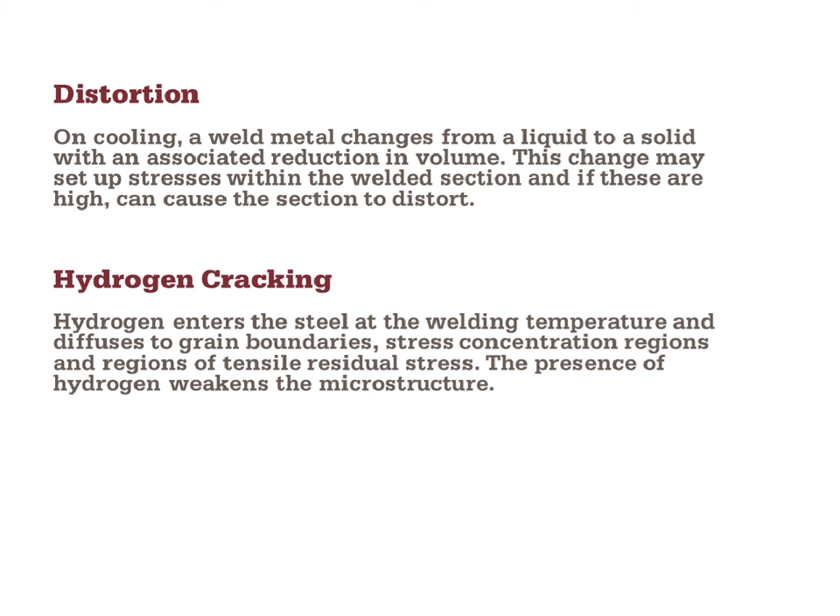When I talked about thermal contraction in casting, the same is true after welding, so we will have distortion to deal with. Also, very importantly in steels, we have to be very careful to keep any hydrogen away from the product. In the manual metal arc process, where I mentioned we have a flux coating, those welding rods have to be heated in an oven for about an hour at 200 degrees C to drive away any water, because any water or moisture will break down, form hydrogen, which then migrates into the weld pool and will very significantly weaken the structure.

In fact, that was the cause of the British Petroleum Foinaven failure, which was a very famous failure. It cost a very large sum of money, and that was due to hydrogen embrittlement in a weld which wasn't picked up, it wasn't detected. The product, the manifold, went into service and subsequently failed.

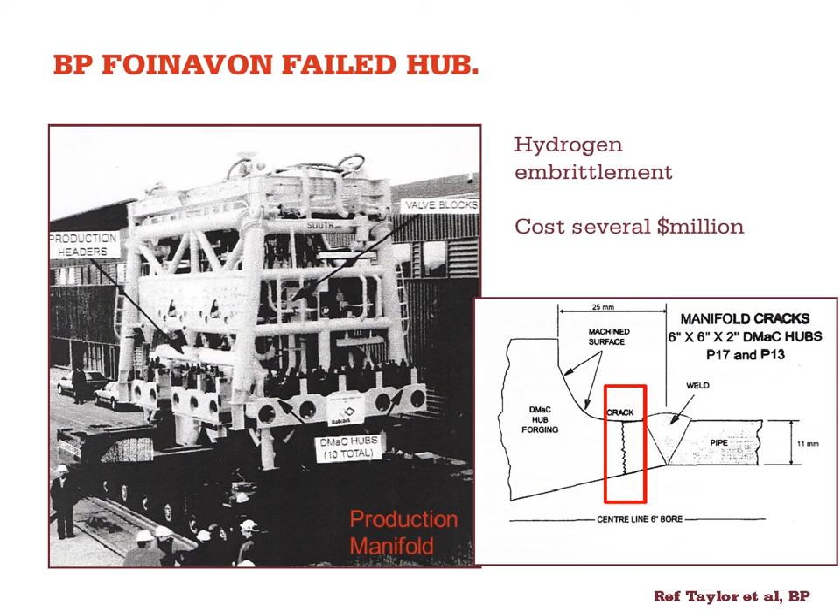So a lot of this, the processes and materials that we deal with, have to be carefully controlled and understood for very good industrial reasons. The products we're using are expensive. If they fail, those failures are extremely expensive.

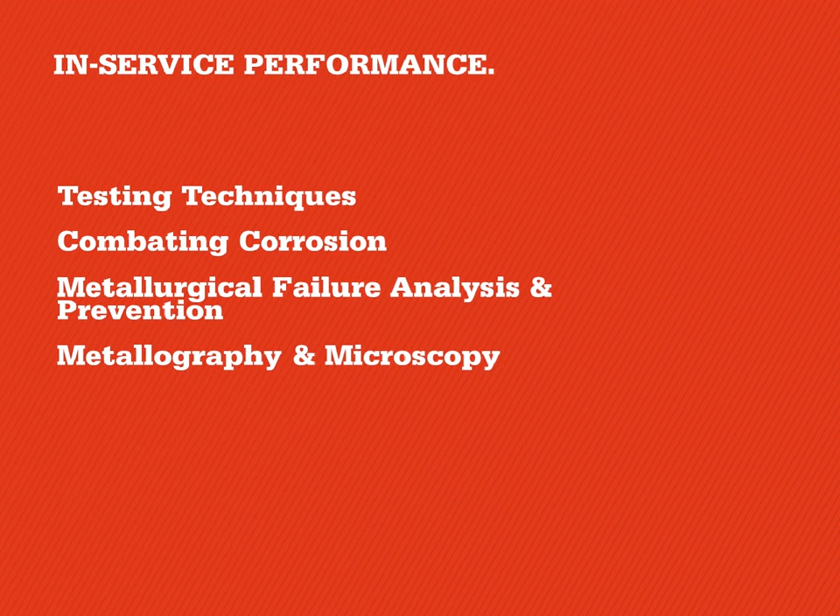So that brings me to the final session on in-service performance. Here we have four training courses where we look at the techniques for measuring mechanical properties, corrosion, analysis of failure, and also microscopy and metallography for forensic examination of failed products.

In the mechanical testing module, we look at the stress-strain curve that I mentioned earlier, how that's carried out, and how from one test we get a characteristic curve representing the strength of that material. From that, we can understand the ultimate tensile strength, the yield strength, the Young's modulus, and the ductility, and the transition between elastic and plastic behavior. All of those terms are defined in the training course on mechanical testing.

Just to give you some feel, tensile strength is relevant, of course, in things like bridges where cables are supporting the weight of that bridge. In choosing a material from which to make these cables, we want to make them as lightweight and as thin as possible, but we have to understand the intrinsic strength of the material so we can calculate the weight and thickness of cables to use.

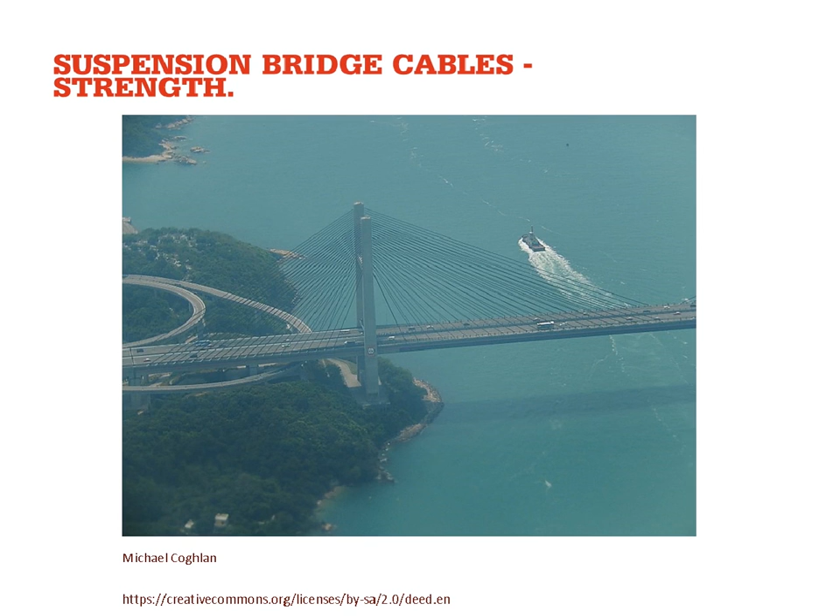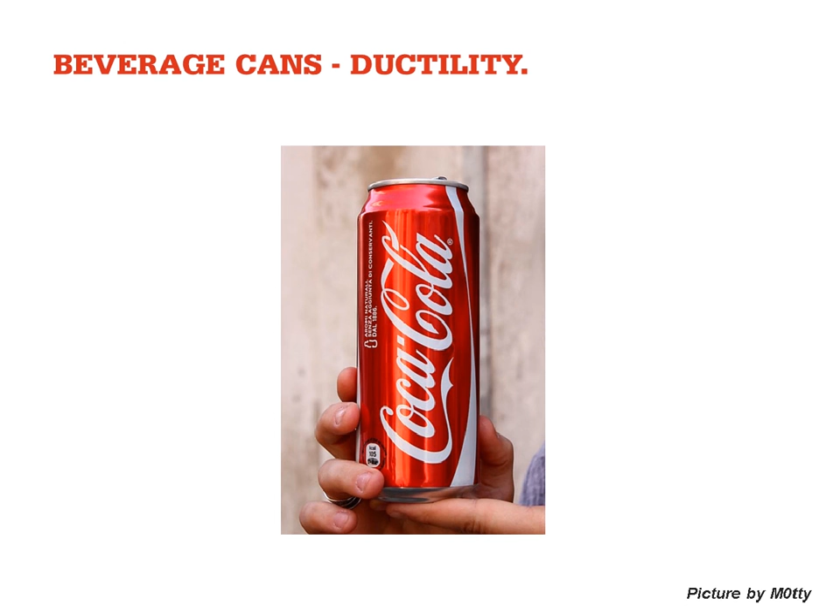That can has been produced by deep drawing a disc down into a punch and die to a wall thickness of less than 0.5 millimeter thick. So the aluminium alloy from which that drinks can is made has to be extremely ductile to be able to deform into that shape without tearing and rupturing.

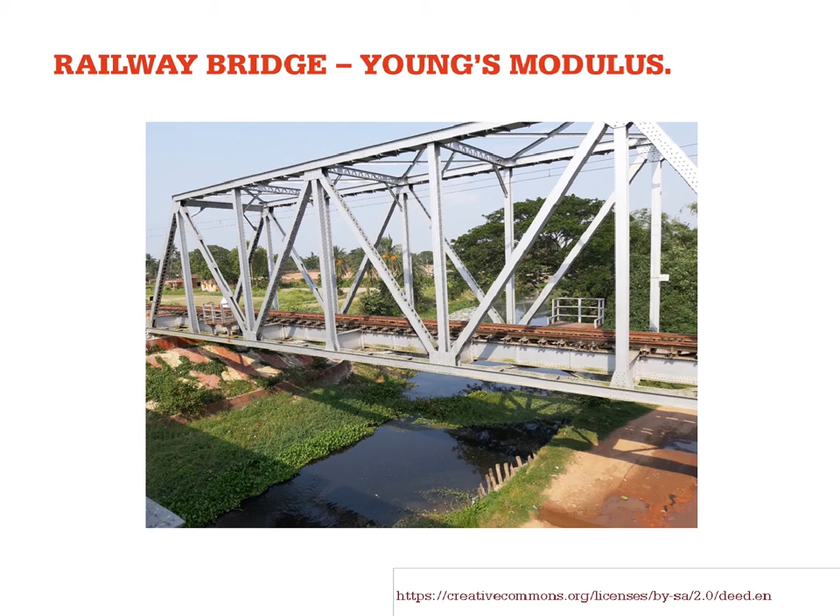Another form of testing is to measure the hardness, and this is done by several techniques: the Brinell, the Vickers, or the Rockwell test. Here we press an indenter into the surface of the material with a known force. In the case of Brinell, it's a spherical indenter which makes a circular indentation. We measure the diameter of that indentation, and that allows us to calculate a hardness number. So that's how hardness is measured and communicated.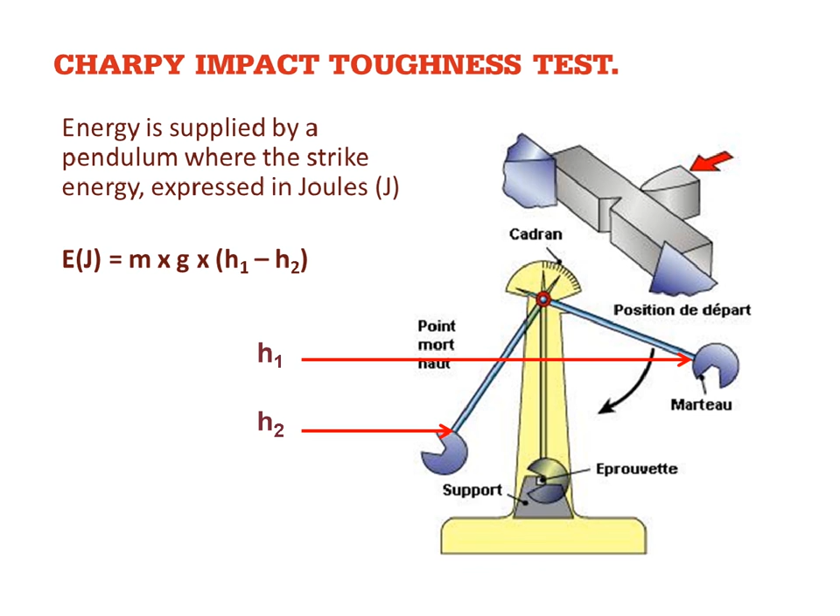I mentioned earlier that it's an important parameter in gear wheels, for example, the combination of hardness and toughness. Toughness is measured in a Charpy impact tester, and here we take a standard test piece of material, we clamp it in a support, and then allow a hammer of known weight to swing from a known height. It swings down, it breaks the sample, and continues its journey to a lower height, H2. And if we know the mass of the hammer, we can calculate the potential energy that was used to break that test piece. So toughness is measured and quoted in units of joules.

In the case of the toughness test, we have to be aware that toughness is very much dependent on temperature, particularly for body-centered cubic materials, so for mild steels, for example. And if we make that toughness measurement at a range of different temperatures, you will see that there is a critical temperature known as the ductile to brittle transition temperature, where the ductility and the toughness drops off significantly.

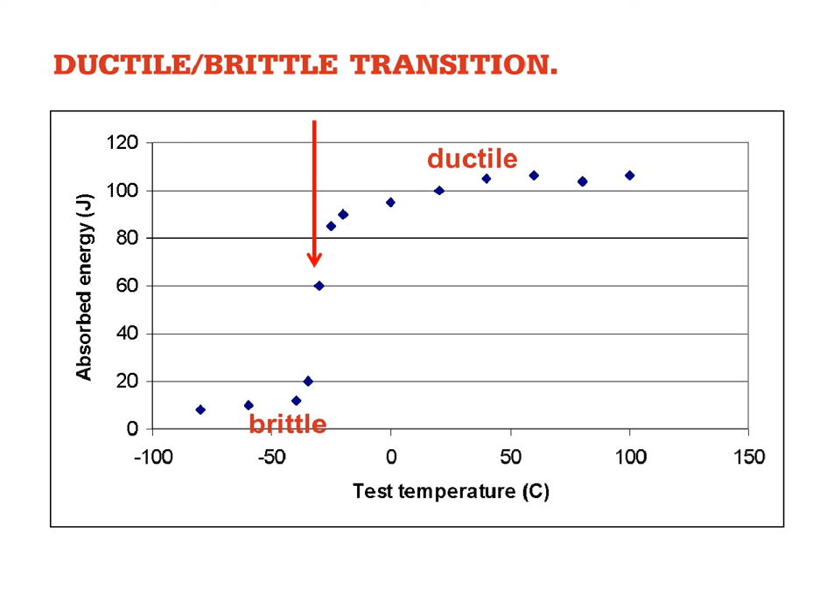So we have to be aware, if we're making a product, say at room temperature, 20 degrees, and measuring its toughness, if it then goes into service at maybe -50, which are the sort of temperatures that we see in the Arctic and Antarctic, they're also the sort of temperatures we see at cruising altitude for aircraft. We have to be aware that the toughness property will have changed very dramatically over that temperature range.

We also have to be aware of creep. I mentioned creep in the context of the turbine blades. Creep is the tendency for metals to deform over long periods of time, often at moderately high temperatures. And that deformation occurs at stresses well below the yield point. So the tensile test would lead you to believe that that material is not going to deform. But other mechanisms come into play, and creep has to be measured to understand the circumstances under which long-term deformation happens. It can result in unexpected failures where, if you rely solely on the tensile data, you would say this heat exchanger boiler is not going to fail. Well, actually, it's subjected to long-term stresses at reasonably high temperatures, and in that case it did fail. So we have to be conscious of that.

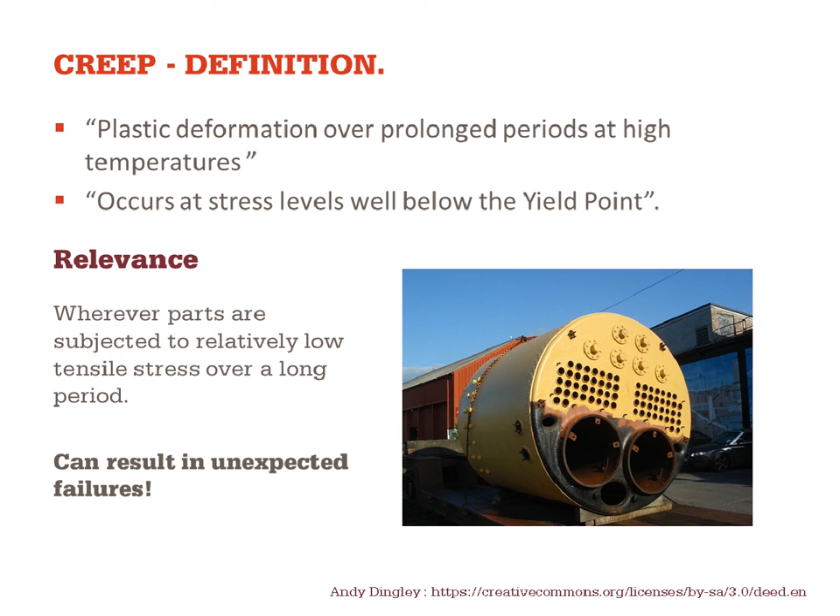Different categories of material, body-centered cubic materials, so steels generally, tend to have a limit here. So if you subject them to stresses below that limit, you can cycle them for many millions and billions of times. But other materials like nickel and aluminium, for example, they will continue, the curve continues down.

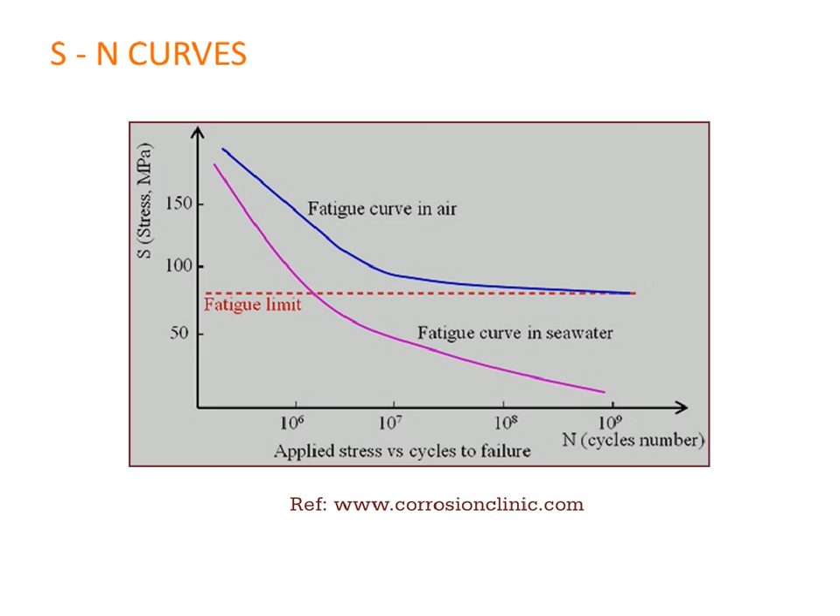So even at very low stress levels, metals will be subjected to fatigue failures eventually. The presence of corrosive media such as seawater makes fatigue resistance even more of an issue. Just one example of where fatigue was a problem: just about 20 years ago, there was a railway accident in Hatfield, just north of London, in which unfortunately 4 people were killed, and that was due to metal fatigue of the rails, which had not been detected and not been predicted.

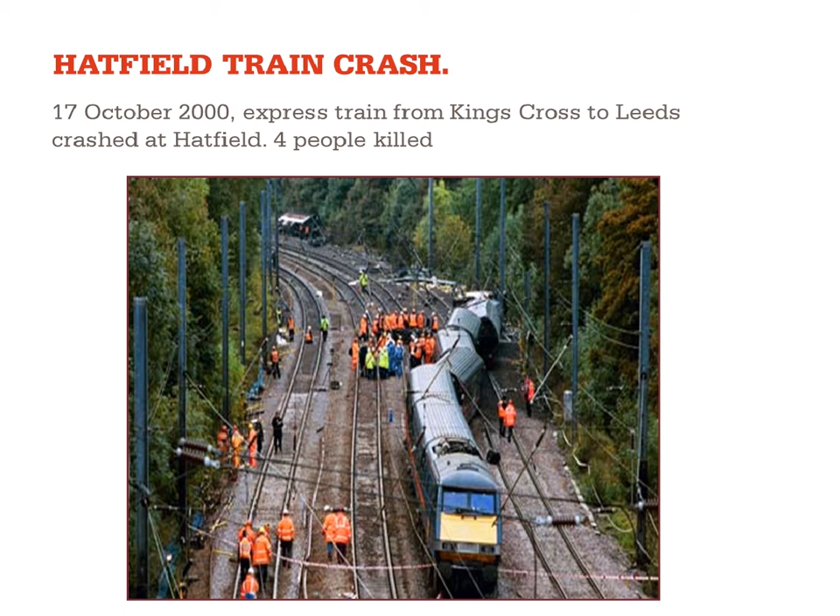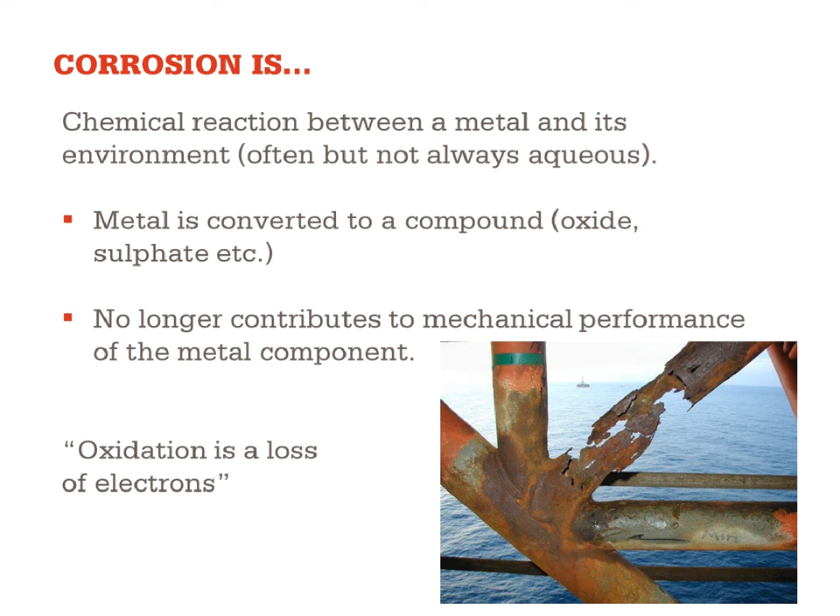And then finally, we look at corrosion. So corrosion is a big problem. All metals, with very few exceptions, things like gold and platinum, have a tendency to corrode. They occur naturally as oxides or sulfates, and they want to revert to becoming oxides, etc. And if the metal gets converted to an oxide through oxidation, it's no longer contributing to the mechanical performance of the metal component.

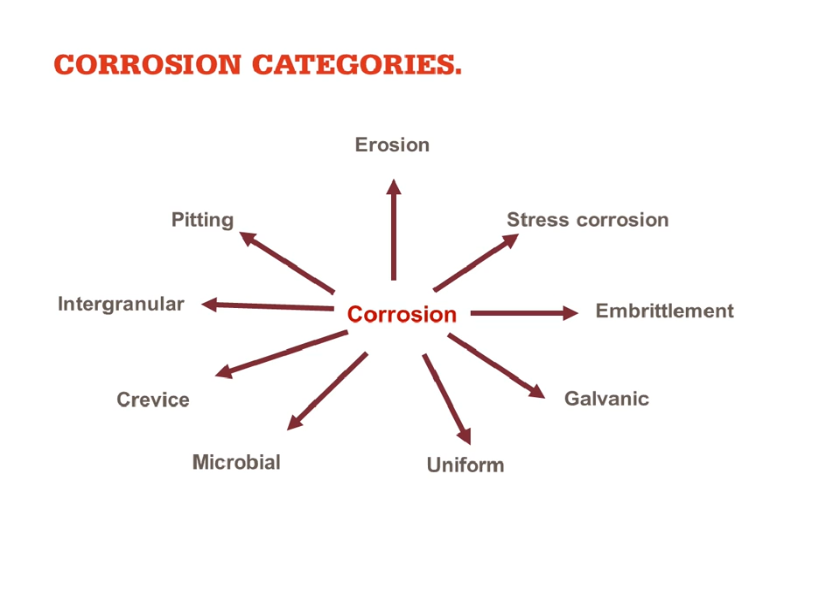There are many different forms of corrosion - I think there are 8 or 9 that I've listed here. You may be familiar with stress corrosion cracking, galvanic corrosion, where we've got 2 dissimilar metals in electrical contact - one will cause the other to corrode. We've got microbial action under the sea, crevice corrosion in different forms, and pitting corrosion, which is a big problem potentially with stainless steels.

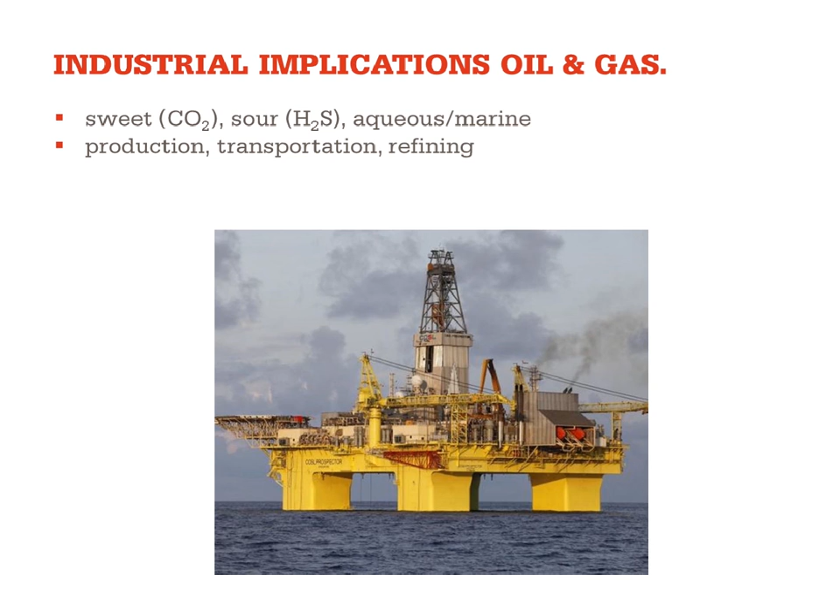So in the combating corrosion training course, we go into great detail on all these different forms of corrosion and where they are relevant. In the oil and gas industry, we've got sometimes carbon dioxide and or hydrogen sulfide present, as well as the chloride ions in seawater, and that is quite a corrosive environment. So there's been a lot of study on the corrosion in offshore environments.

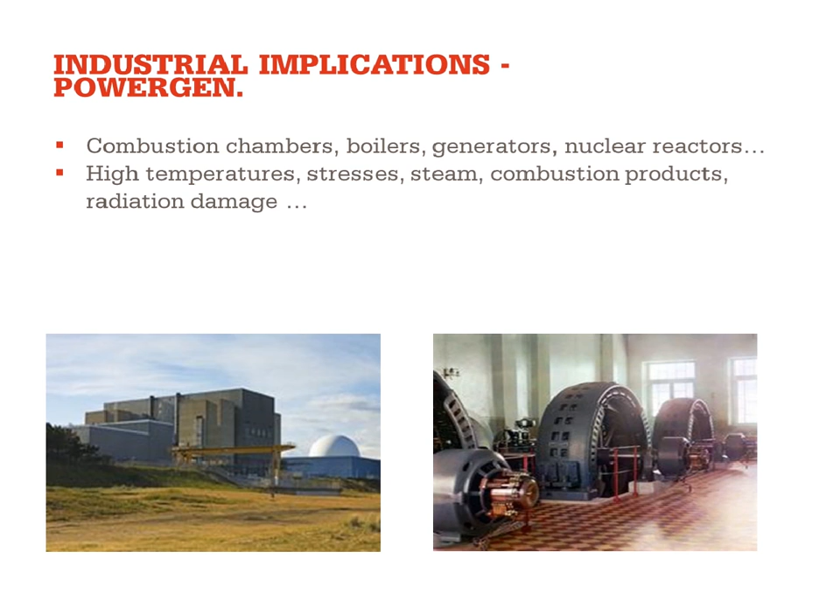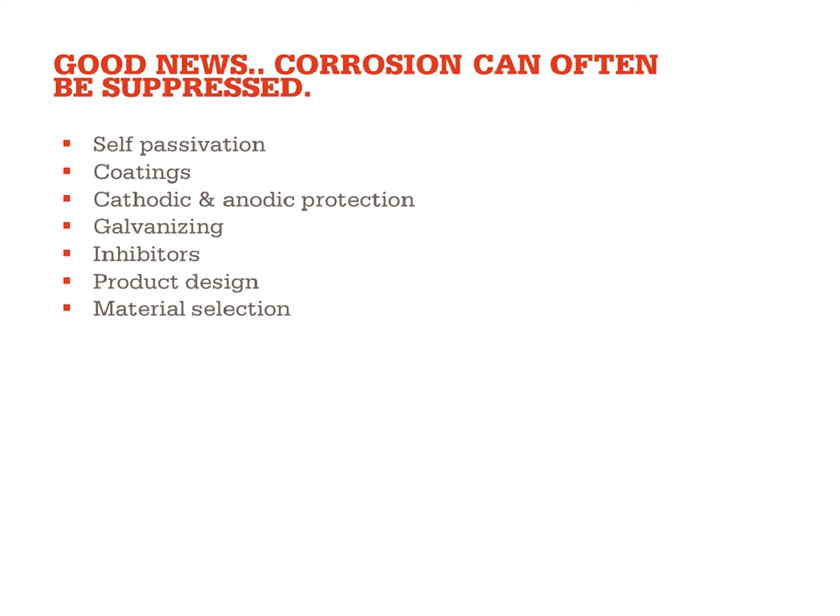Aerospace aircraft are subject to corrosion. It's also an important limiting factor in things like power generation - nuclear power stations and conventional power stations, corrosion is a limiting factor. But the good news is there are also many different mechanisms by which we can prevent or suppress corrosion. So in that course, we look at self-passivation, different forms of coating, anodic protection, galvanizing, etc. Far too many for me to describe today.

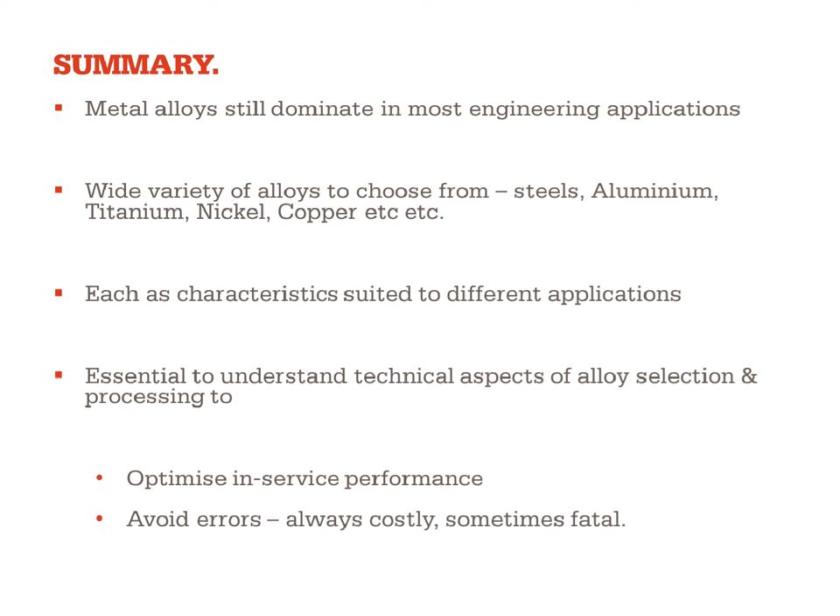So that brings me to the end of the presentation. I apologize, I've overrun slightly, mainly due to the technical breakdown we had. So I hope I've been able to explain to you that metal alloys still dominate most engineering applications, and there are a very wide range of them to choose from: steels, aluminium alloys, copper, nickel alloys, etc. They all have different characteristics, different chemical formulations, and the way in which they're heat treated is essential to understanding which material to use in which application and how to produce products from those materials.